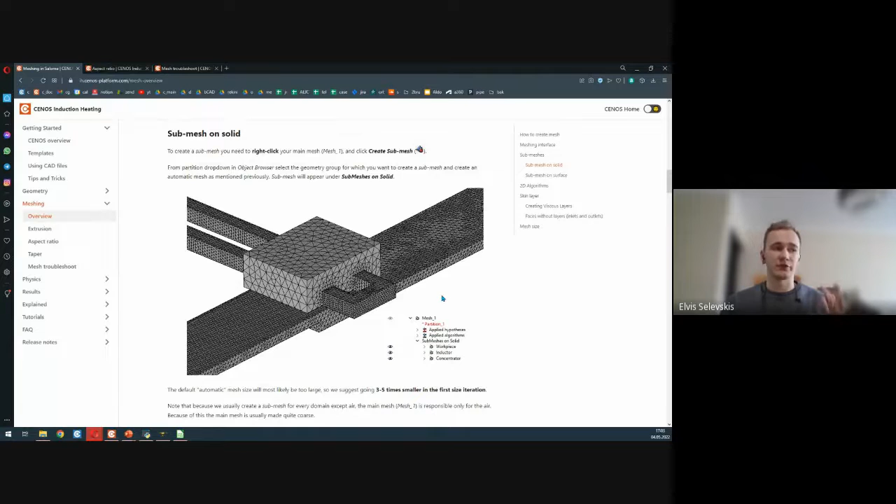Basically, what manual meshing and meshing in general is, is taking our geometry, whatever kind it would be, and splitting it all into smaller triangles, because that's needed for the calculation part of the electromagnetics and thermal analysis. All of that depends on us splitting the geometry into simpler elements, which in this case are triangles. Here we can see a part, and here you can see it all split into triangles.

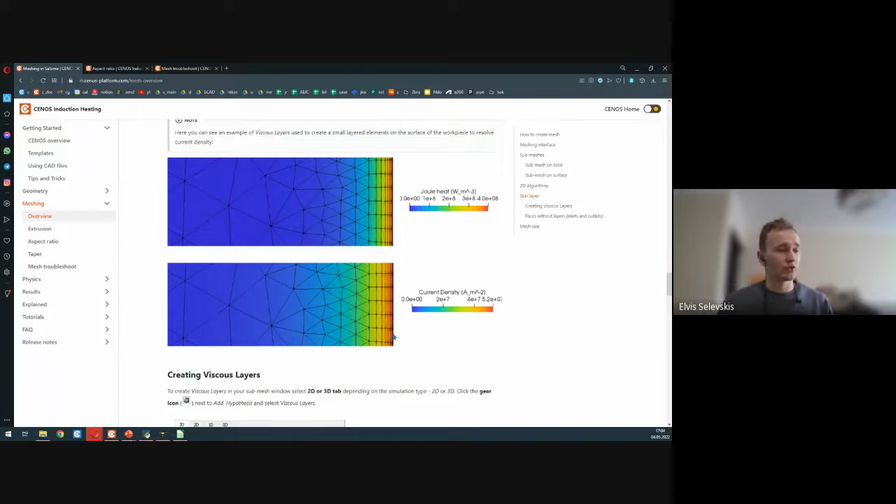Also a couple of algorithms, and also about the skin layer. To fight the skin effect that we have in induction heating, we will also apply viscous layers on the surface of the mesh, so that we can be sure that the high current density at the beginning of our simulation will nicely flow into the workpiece, and we won't lose anything there.

So we can turn back to the presentation. I have prepared an example where you can see a part being meshed here on top with some kind of preset mesh max size value. That's the size of these triangles that everything is split into. And another example with these triangles very fine.

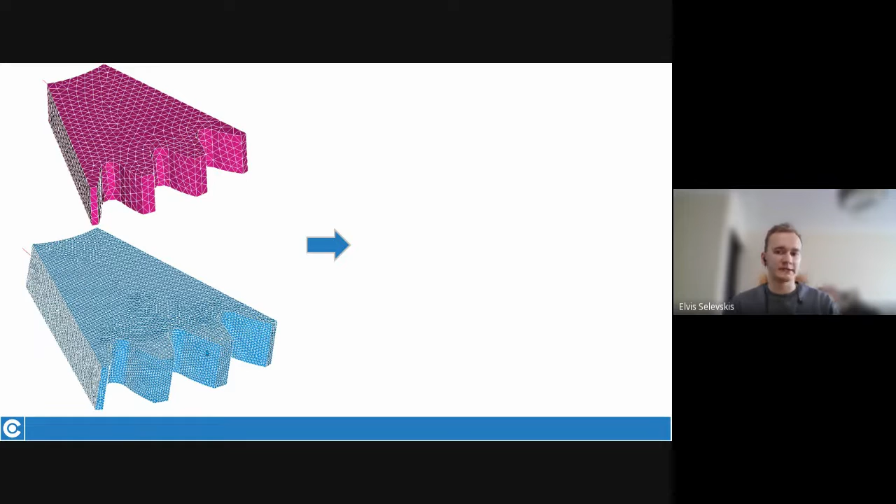The difference between these two is that the one on top has fewer mesh elements, so it calculates faster. But the problem is that the thermal distribution and temperature on this workpiece might travel visibly through these triangles. The one on the bottom has a lot more elements, so it calculates a lot slower, but you'll see the temperature distribution a lot better in the end results. What we will try to achieve today is to get the best of both approaches.

So having a very rough mesh or a very fine mesh, that would mean we have a mesh which is rough on the places where the inductor is not that close to the workpiece, and finer where we have very high current density. For this application, there's also hardening happening at this location. So to put it simply, we have rougher mesh everywhere else and finer where we really need it, not on the entire workpiece, but only on specific places.

What are the positives with this manual mesh optimization? The mesh max sizes will be better optimized, meaning we will have faster calculations but they will still be accurate. So better temperature tracking, also reduced mesh size. Instead of having very small mesh triangles on the whole workpiece, having them only on certain places will result in faster running calculations.

Another good thing here is that more complex CAD can be used, and perhaps even less need for CAD simplification. Because if you spend a bit more time meshing, and try to understand what kind of values would suit the particular project best, you can get away with having CAD which is a lot less simplified than for automatic meshing, where we would need to simplify the CAD files a lot more.

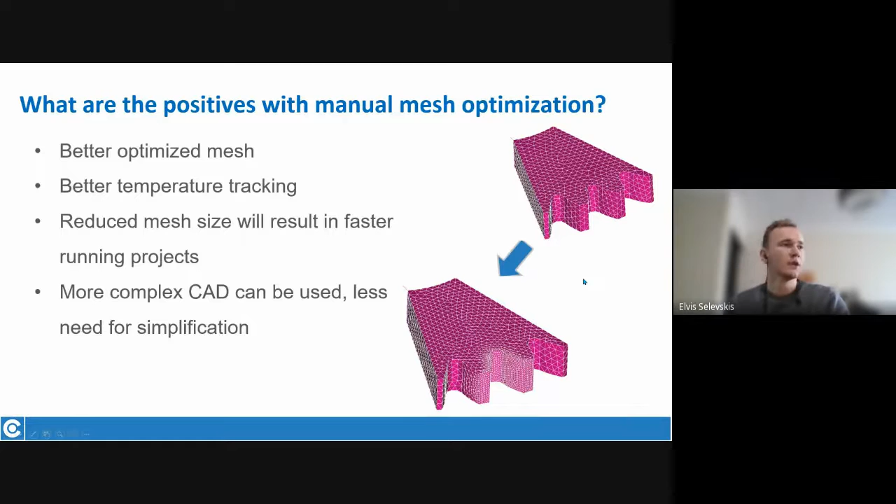What kinds of negatives are there with this approach? Manual meshing does require more time spent setting up the case, because we have to also enter Salome, which is where we deal with manual meshing as of right now. And of course it does require a bit of training to understand this approach better. That's also something I will try to show you today, and let's hope we get through this and understand the approach better by the end of this webinar.

But okay, let's start with setting up the case. First up, as always, we go to Save As and just save the case. I will write down the name, CENOS webinar, webinar 3. Press save, and the approach we will use in this case is the FromCAD approach. We will deal with the whole geometry grouping in FromCAD, and then with the meshing in the advanced geometry editor.

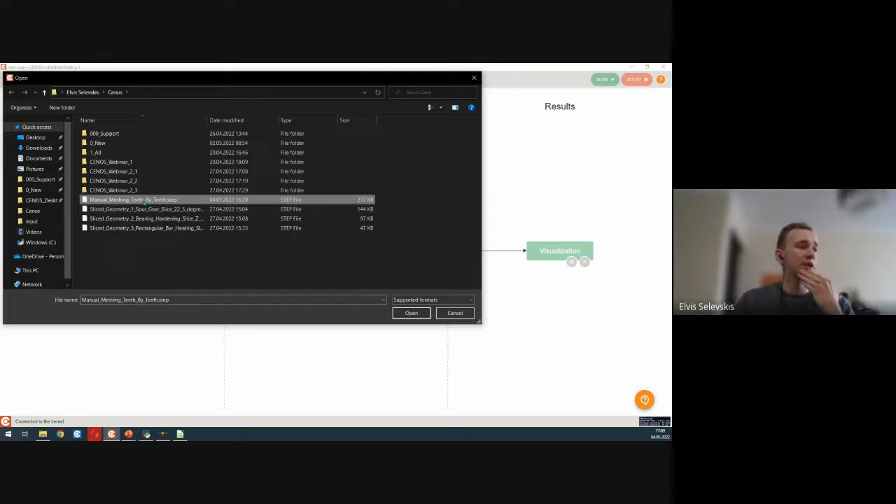So here, let's enter the FromCAD, and for this I have my step files already made right here. I just click on them, press open, and the CAD files will be processed.

Okay, so here you can see the geometry which we'll be working with. In this case, it's actually a slice geometry of a large gear hardening application. And here we have our inductor, also with the flux concentrator in this case. So it's a teeth by teeth kind of application.

For the simplicity of this video, I won't be setting up the proper boundary conditions for the sides here as a slice. For that, you can check our previous webinar recording. But I will mainly focus on what we need for manual meshing.

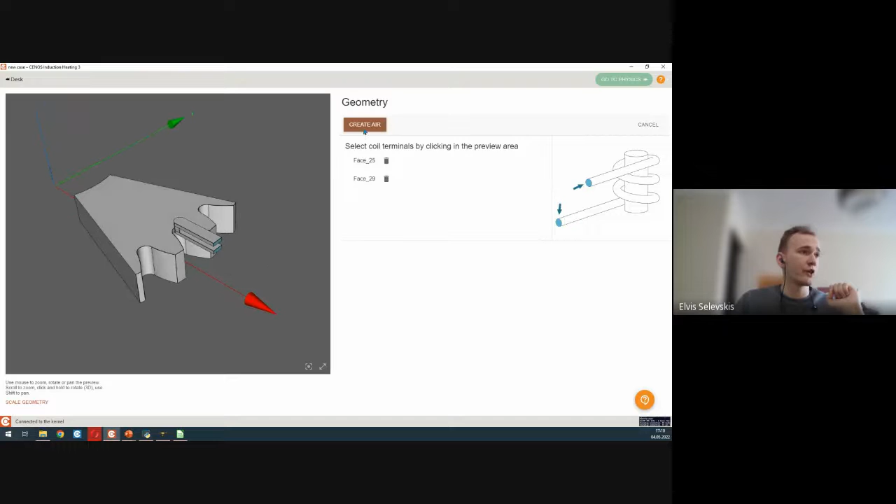In this case, I will also create the automatic air domain. Press yes, select the inductor's terminals. So here is the entry and here is the exit. Press create air. Air will be created in a moment.

I will start with the groups, which would be made as we would usually have them. First, I will select the workpiece as we would usually do it. For the workpiece solid, press select it here on the left, write in its name here to be the workpiece, assign workpiece. In the same way for the inductor, we just click on it, click on the inductor, rename it.

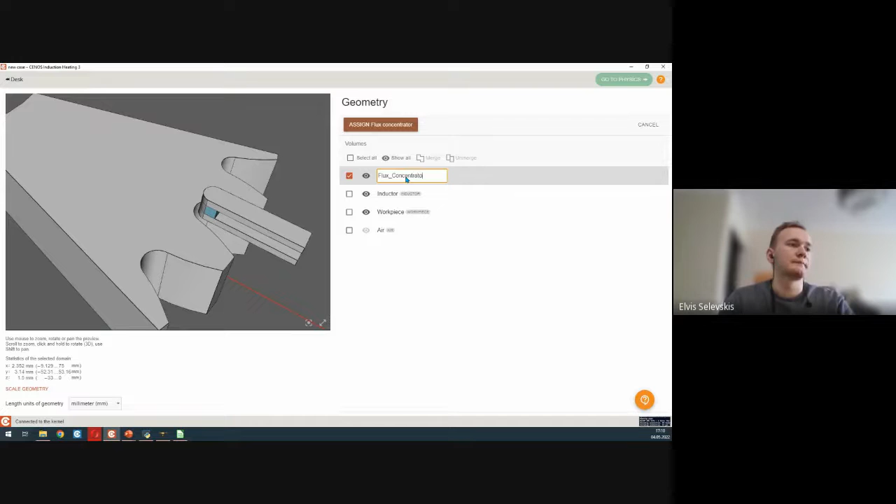And in this case, since we also have the flux concentrator, I will press add new role and choose the flux concentrator, which is right over here. Flux concentrator. Okay, assign it. And right now we will have some kind of changes from the usual case setup.

So actually what we'll need will be two separate workpiece surfaces. In this case, I will have one workpiece surface for this gap here where I will want the mesh to be finer, and a separate workpiece surface for all of the other faces, because we still need to have some kind of heat loss happening on the entire workpiece, of course.

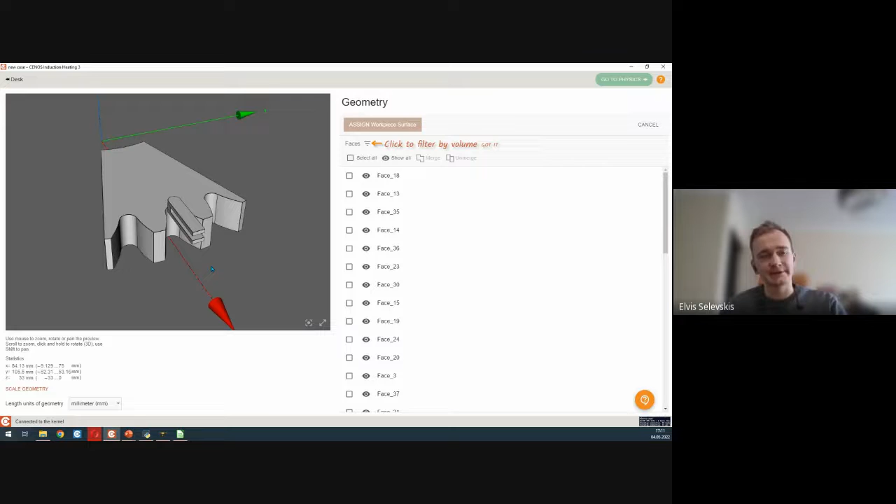So for this workpiece surface, I will press select. Here, what you would do also for your cases, you would select the faces where you would like the mesh to be finer. As I said, in this case, those would be this one, the one in the middle, and this face right over here. By holding down Shift, you can select multiple of them. So these would be these three faces.

If you want, you can also have the ones on the sides. Also, if you would like to have multiple of these groups where you have specific faces where you want different mesh size, you can also create as many of these groups as you want. You can actually have a different mesh size for each of the faces if you want.

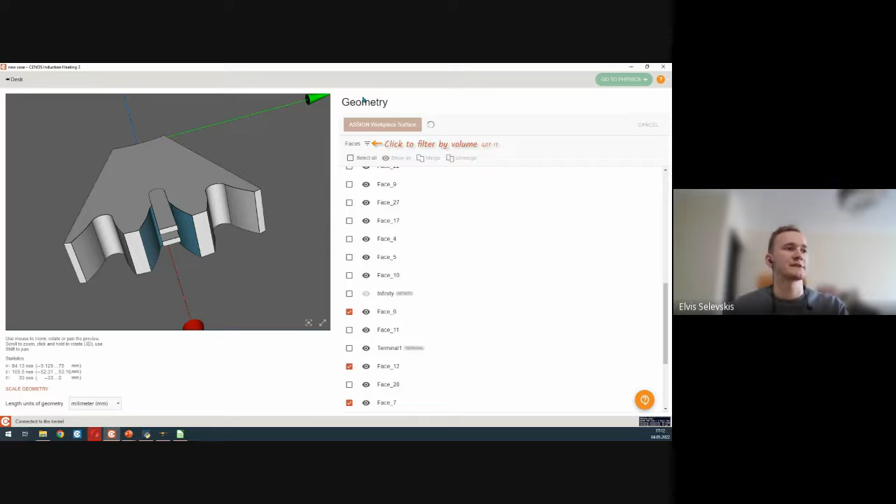But I will press assign workpiece surface, and right now to assign the rest of the workpiece surface, I will just press add new role, check the workpiece surface here, and I will filter the faces by volume. Just select the workpiece so we can select them easier. And I can press select all, but only scroll a bit down and deselect the workpiece surface which we have already, because that one we don't need in this group. Press assign.

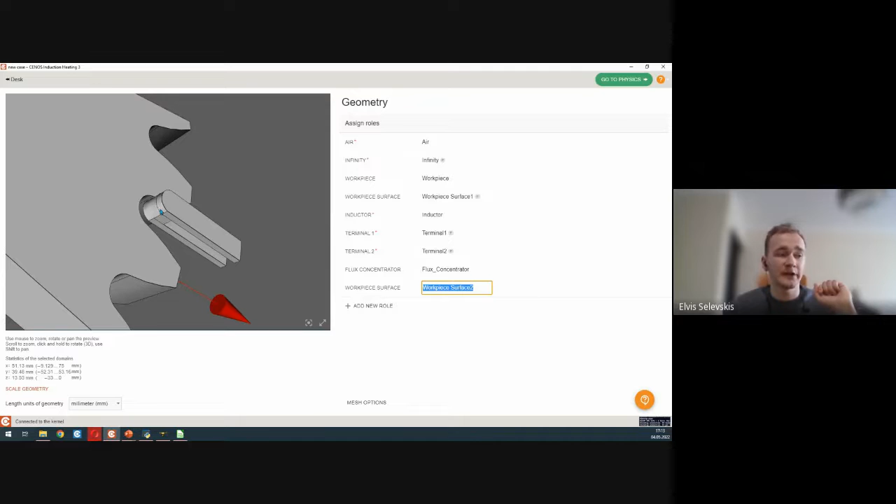For this setup, at least for this case, this is pretty much it. One thing which I can mention, I will also mention it a bit later, but also if you would like to have some kind of inductor faces be finer, so in this case, let's say if this inductor face we would like to have finer, we can add new role, other, and then just select those faces also in a separate group.

All right, now we can go through the physics. In the physics, I will input some generic values because we will mainly focus on the mesh in just a moment. In the simulation control, I will input frequency of 10,000 hertz and time of, let's say, 5 seconds, calculation time step of 0.1.

And then for motion, if you would like to also recreate this case after the recording is uploaded to YouTube, we can also have some kind of complex motion. In this case, that would be the z-axis, and the inductor would move downwards, or the workpiece would move upwards. In this case, I will actually move the workpiece with some kind of movement speed here on the z-axis of, let's say, something like this.

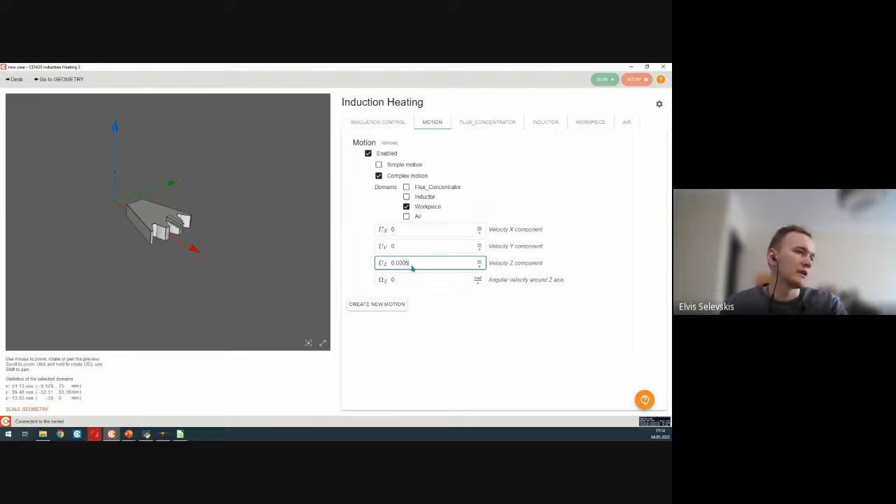So that's half of, that's a little maybe, okay, something like this in the upward direction to the z-axis.

For the flux concentrator, we just have to select the material. In this case, I will use Ferrotron 559H. Nothing more to do here unless you want to change the magnetic permeability and run it with a set value. For the inductor, I will input the current which we will use, let's say 5,000 amps. And for the workpiece, I will input the material of 1045 medium carbon steel.

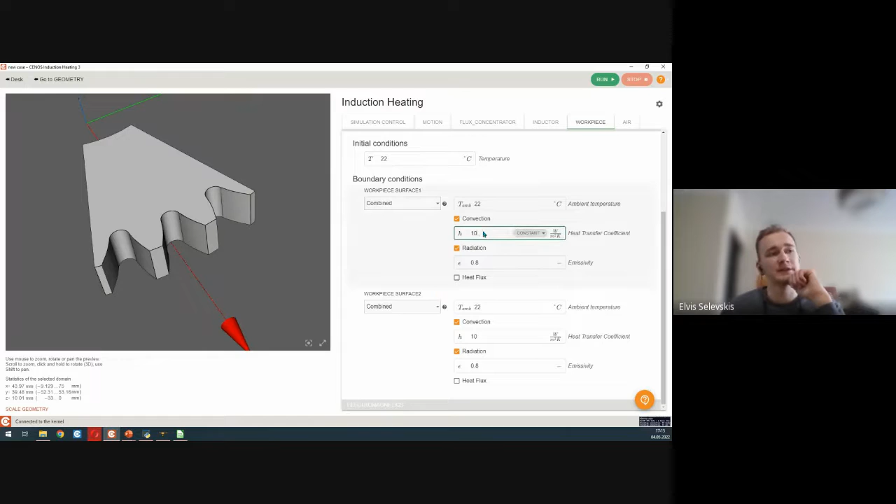Now we'll get to the main course, going back to the geometry, entering the mesh options, and pressing create automatic mesh now. This will create the automatic mesh. If you've ever run a FromCAD case without manual mesh adjustment, it just makes the automatic mesh with some kind of presets the software has, and we'll use this automatic mesh in Salome just to adjust its values. It will basically have created a template for us that we can nicely use, and for this template we will just adjust the max size values as we see fit.

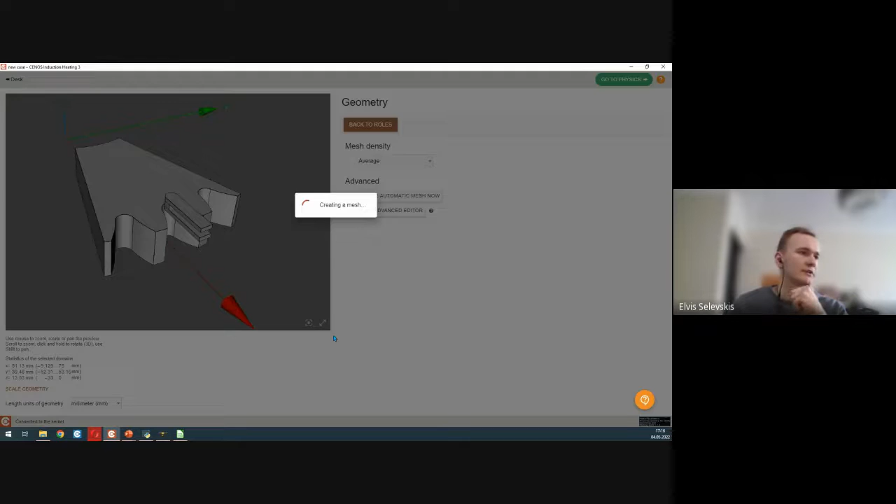This might take a moment. Oh, actually it computed quicker than I thought.

Also here on the bottom right, for some of you who might not have seen this before, we can see the number of mesh elements, so the number of triangles produced for the air, flux, inductor, workpiece, and total. But as I said, what we'll actually do is open the advanced geometry editor and adjust the mesh max size values on our own.

Okay, Salome is opening in just a moment.

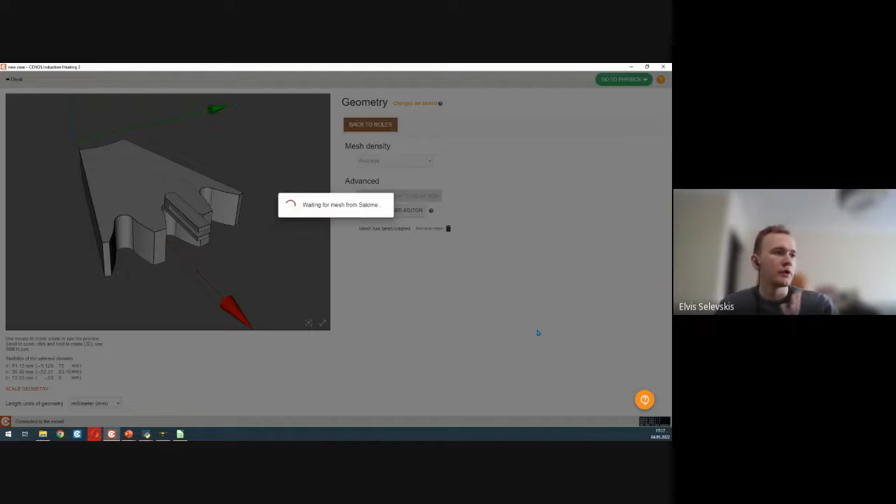So while we do not send the mesh back from Salome, this window will be open the whole time in CENOS. That will only end when the mesh is received. Salome has opened for me, and since we've dealt with the geometry and grouping through FromCAD...

We can automatically go to the very last section here, which is the mesh. In the meshing section, here on the left, we can see the object browser. For the mesh, we can click the open button, and here we see our Mesh 1. Mesh 1 is the large general mesh inside of which all of our smaller solids are located. But inside of this mesh we also have submeshes, which are our solids: the workpiece, inductor, and flux concentrator. Once again, this is pretty much a template that CENOS has made, and we can nicely adjust these mesh size triangle values for each of these separate submeshes.

What I will do is right-click on Mesh 1 and try to compute the mesh. I'm not sure if it will go through or not, we'll be able to see. But after it does or doesn't compute, we'll have a good idea of how the mesh looks now, what can also be adjusted, or any kind of changes that might need to be done.

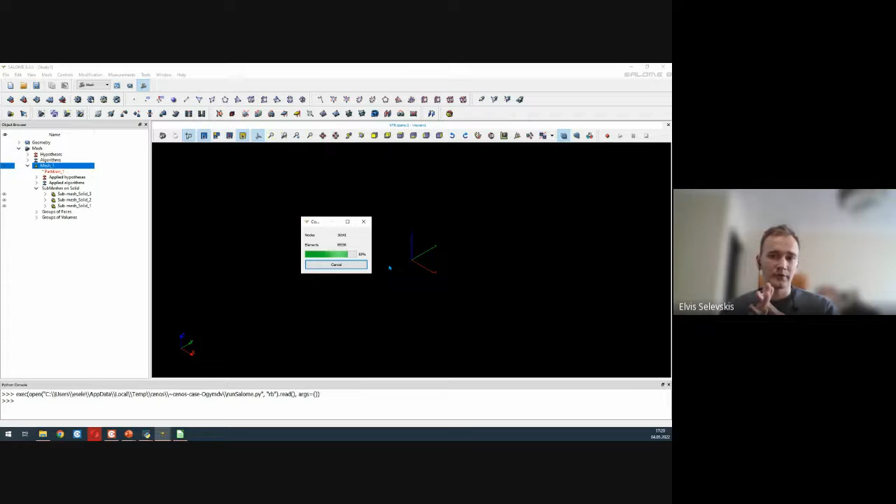Another thing I can mention: if you sometimes see that this meshing computation is taking a lot of time, have a thought—is your geometry really that complex that it should take that much time? Maybe it has stuck at some point. I would say if it doesn't compute for like 5 minutes and your geometry is not very complex, then it has most likely stopped or is just not able to compute something.

For us, luckily the mesh computation has succeeded, and here are some interesting things we can see. Where we have the volumes, this amount tells us how many triangles, or mesh objects, have actually been made in this mesh. A couple of quick tips about this number: I would usually recommend that you try to keep it under 300,000, depending on how complex your case is, but for most cases you should be able to keep it under that.

Why do we want to keep the amount under 300,000? It's because afterwards the amount of RAM necessary for computing the case just starts to grow quite a bit. If you have 32 gigabytes of RAM, you should be able to compute cases up to like 450,000 elements, but upwards of that, more and more RAM is required.

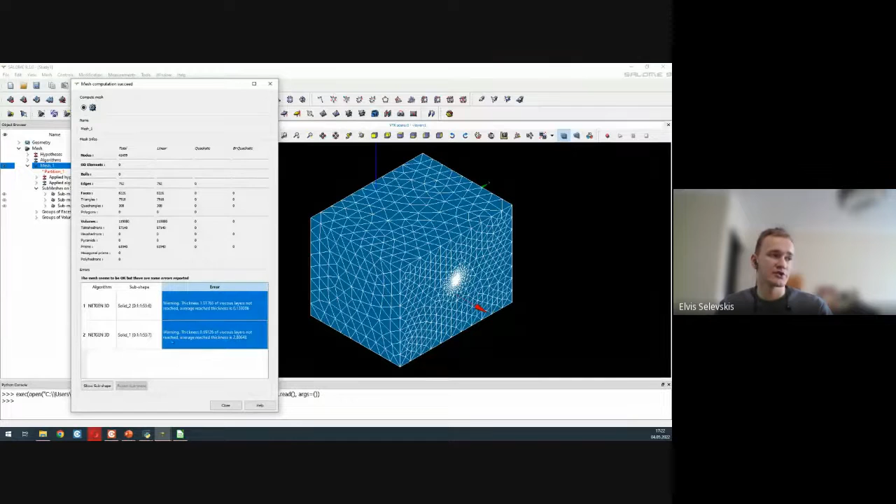Some other things we can see here: these two things are some kind of warnings. They're not errors, but they tell us that some kind of thickness for the mesh, for the viscous layers, has not been reached. This can be because of the geometry being, let's say, too thin, or having some other issue where certain mesh values input by the automatic mesh cannot be reached. This doesn't mean there's an actual issue—there are no real errors, just warnings. If we close this up, we can finally take a look at the mesh.

Here we can see the large airbox—this is the entire airbox. You can see the triangles here are quite large. Outward of the airbox, if we zoom in, we can actually see the inductor's terminals with the viscous layers already developed on the sides, on all of the outer faces of the inductor.

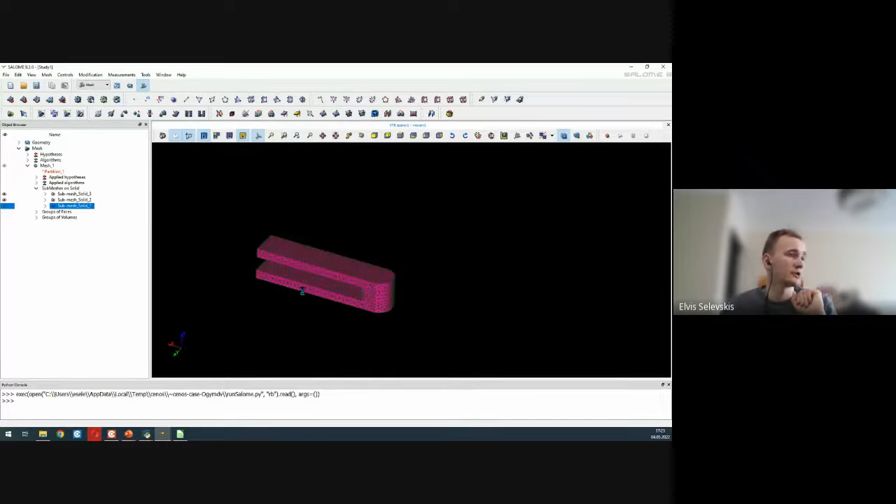If I disable visibility for mesh 1 and just enable it for each of the submeshes, here we can see our flux concentrator, here we can see our inductor as well. Everything has nicely split into triangles—it looks quite good, to be honest. And also our workpiece, which, if you ask me, is a little too rough for what we'd like to see. If we ran the case like this, we would most likely see some hotspots resulting from the mesh, because there are too few points where the simulation can compute and result in a nice temperature distribution. So you would probably see these triangles also in the result.

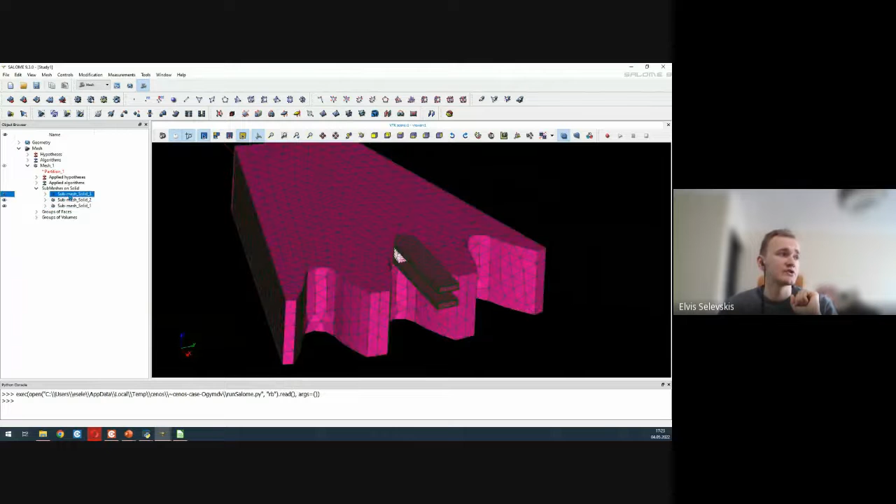What we will do now is try to adjust this triangle size just for the workpiece. To do that, we click on solid 1, right click on it, press edit submesh, and when we enter we're automatically in the 3D section. Here we can adjust the viscous layers—exactly the same thing we saw on the inductor. We have them also inside the workpiece, as well as a couple of computational algorithms in the 2D section. And for the 1D section, here we can adjust the max size of the triangles within our workpiece. To adjust this value, we can click on the gear icon and press max size.

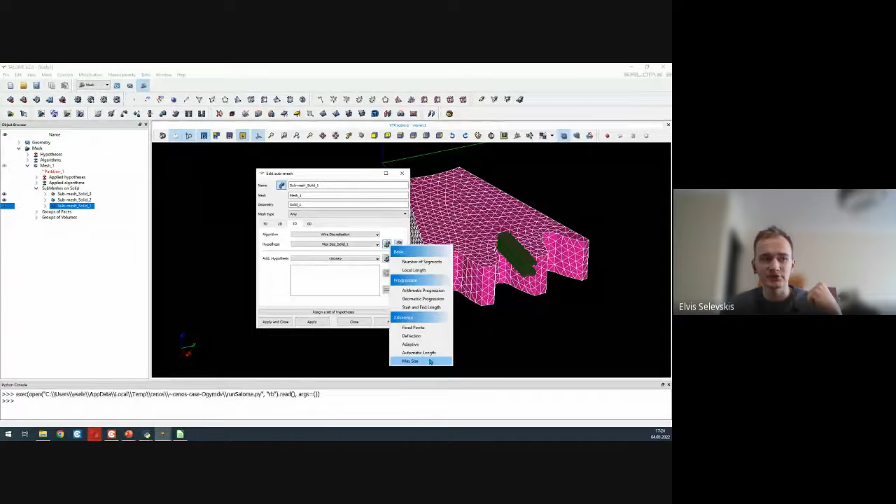This will make a new kind of value for the mesh, for the max size of the triangle's edges. Or we can press the edit button to edit the value we already have. As you can see, the length here is like 2, and the units are millimeters I believe—so 2 millimeters. What we can do, if we decrease this value, the triangles will also get smaller, since their edges won't be able to be as long as they used to be. If I write in the value of 1, so this is 2 times smaller, press OK, apply and close, and try to recompute the workpiece.

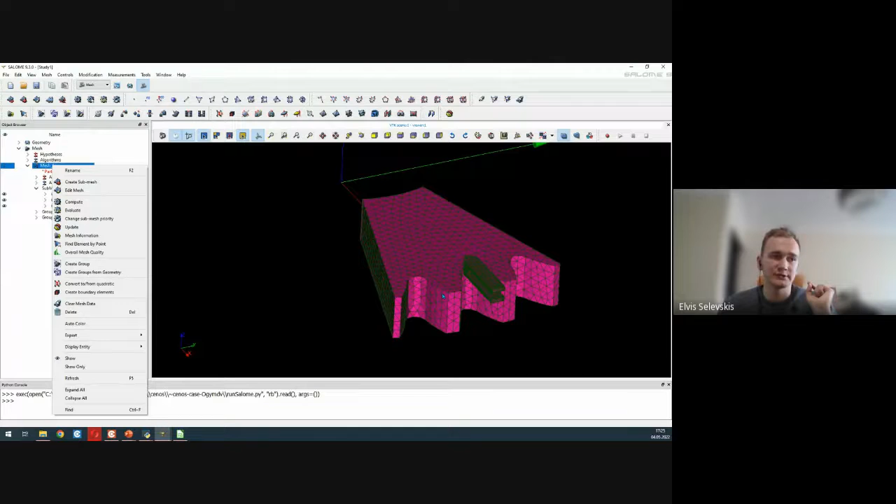Here I'll click on mesh 1, right click, and clear the mesh data, so we don't have the old workpiece and old mesh on top of it, since we changed the value in submesh 1. Right click on submesh solid 1 and compute the mesh. We'll see how long this takes, but it should be a bit longer than previously, because as I said, we'll have 2 times smaller triangles—meaning more of the smaller triangles, since we still have to fill the same volume, just with smaller triangles.

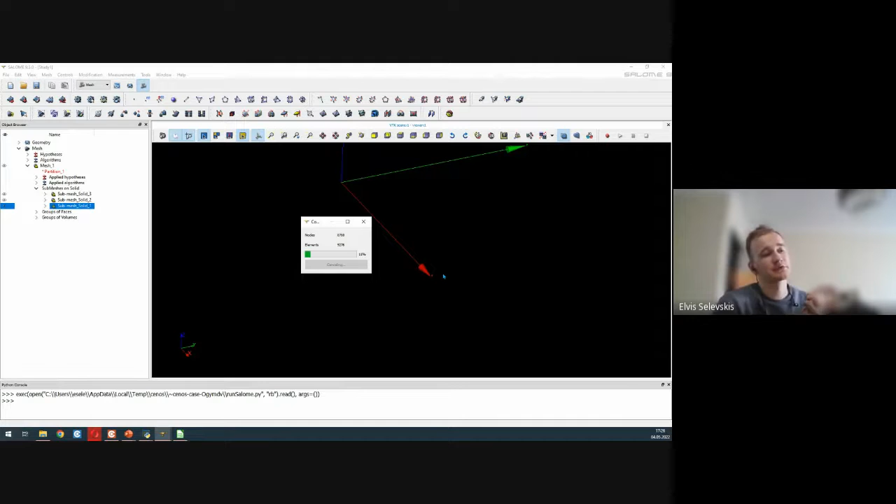In this case, I expect it should take a moment, because we still didn't adjust the viscous layer values, which is also something very useful that we could do. Okay, I will try to cancel this. We will see what has already been made. Then we will adjust the viscous layer values and try to recompute it again, just to show you how much the viscous layer values can change how quickly the case computes.

About viscous layers, as I mentioned at the very beginning of the video, here we have multiple elements on the very surface of the workpiece. The small problem is that in the originally computed values by the software, there's a bit too much of these viscous layers, at least for most cases. So that's something we will reduce in order to have fewer elements in the end.

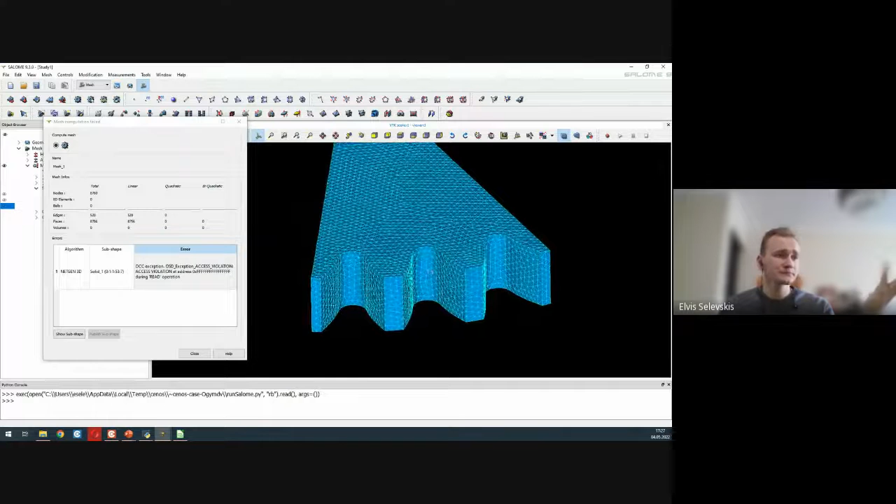Here we can see that the mesh computation has failed. Now this is an actual error, but that's because I actually stopped it. We can see that on the surface these elements have already computed, and the mesh is actually quite a lot better than it used to be. This is pretty much something actually usable already.

But to adjust the viscous layer values, we will go to submesh solid 1, press edit submesh, and go for the viscous layers here to edit their values. If I press edit, we can see the three main things which we have for the viscous layers.

So the thickness, that is how thick the viscous layers will be; the number of layers, so this is how many of these layers there will be; and the stretch factor, which is by how much each of the next layers is thicker than the previous one.

What I would like to comment here: number of layers 17, for usual kinds of cases, this is way too much. I would say if you're running low frequency, then usually number of layers 4 is perfectly okay. And as you start to increase the frequency, or your case starts to get more complex, I would suggest, if possible, have 5 or 6 layers. And if you have really high frequencies, then have like 8 as the number of layers at least.

For this case, I will use 5 as my number of layers, and for the total thickness, this value has been computed to match the 17 viscous layers. So this thickness value also has to be recomputed.

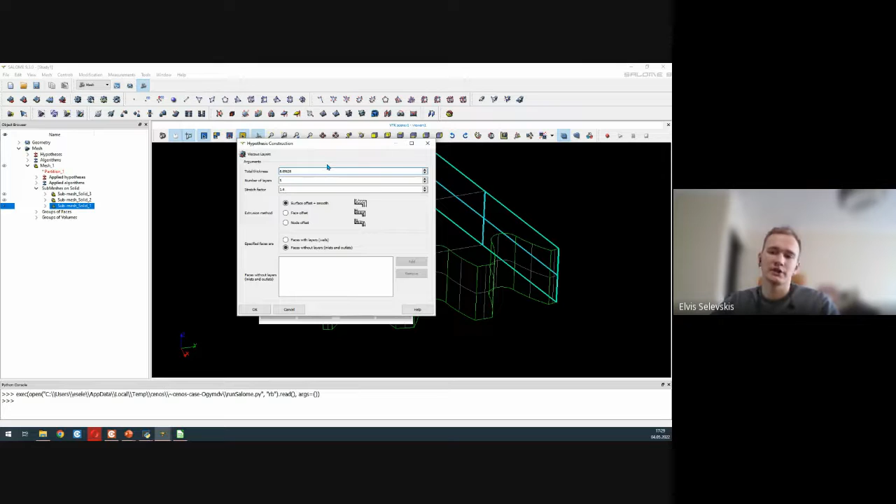To recompute this, some of you who were here for the 2D manual meshing and case setup video will know that we use the viscous layers calculator, which I have right over here. Some of the inputs which we have here at the very top are the magnetic permeability of the material, the frequency we're running, and the maximum electric conductivity.

And then at the end we get the recommended viscous layers skin depth values. Here we can also see common magnetic permeability values and common electric conductivity values. As it was 1045 steel that I used for the workpiece, we can check the common mu values. This is once again an approximation, but it's something which works quite well.

So 150, we just input that right over here. After I press enter, you will already see how these values change here on the right. You can see that they greatly change just by changing the magnetic permeability. Then the frequency, it is 10 kilohertz, that's correct. And the electric conductivity should be changed for the one which I have here for the 1045 medium carbon steel.

Right here we can see if our number of layers is 5, so that's the number of layers that we do run, we have to use the skin depth of roughly 0.35 millimeters. So let's just go back to Salome and input that value. So here, 0.35.

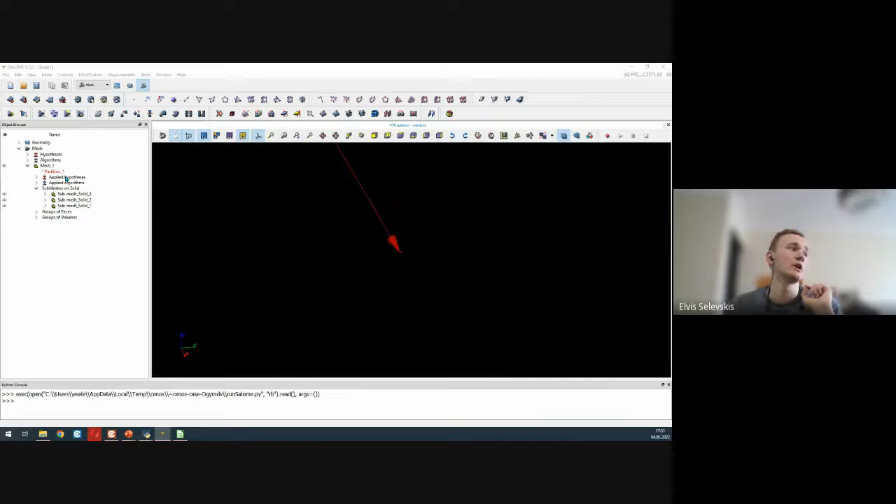And that's pretty much it, nothing else needs to be changed. Press OK, and that's the only thing which we will change. I will press apply and close. Once again, clear the mesh data just so we don't have any leftovers. And I will press compute, and I believe this will run through a lot quicker than it did previously.

Previously we actually canceled the computation of the mesh, but right here I think it will manage to go through. Yeah, so as I said, it manages to go through, and a lot quicker than it did previously.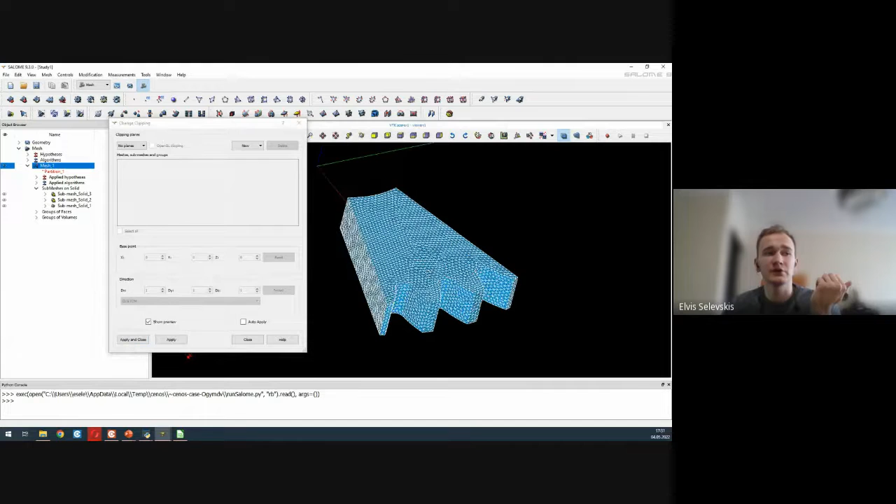Perhaps to put a better visualization on how these viscous layers actually look, I can right click on our workpiece and use the clipping aspect, which will allow us to see what's happening on the inside of the workpiece. Here on top, I can select new, some absolute or relative. Let's go for absolute, and here we can see where our cut is located.

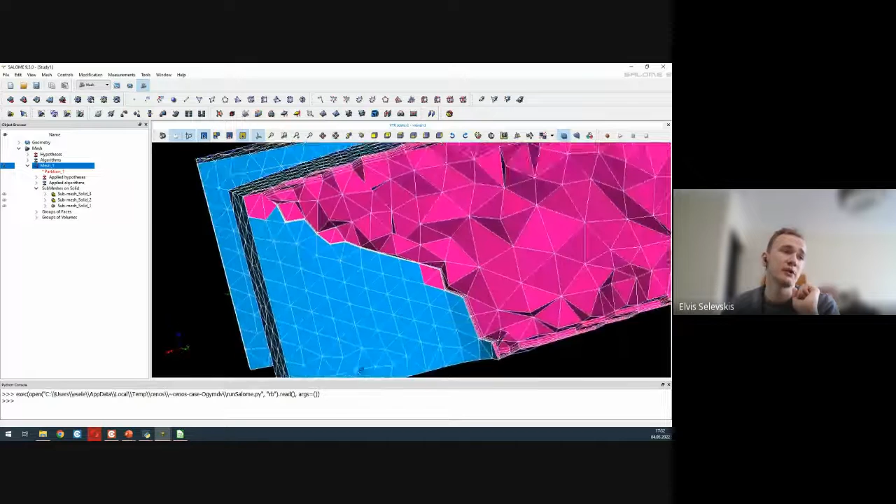So we can move it by dragging the arrow or dragging the red box, so we can see where we want the cut to be made. For me, it's perfectly okay to have it here. Press apply and close, and we can see how this mesh actually looks on the inside of the workpiece. Here we can see the general mesh triangles, and on the very surface of all the parts which we cut.

We can also see how our viscous layers are looking. In the next webinar, the fourth one about result visualization, we will also see how much these actually do impact the current density and the proper soaking up of the current inside of the workpiece.

But okay, this is it for the initial adjustments for the workpiece submesh. In the same way, we can go for the inductor submesh, which I believe was this one, or this was just a moment... oh no, never mind, that was the flux. Let's go for this submesh, which should be the inductor.

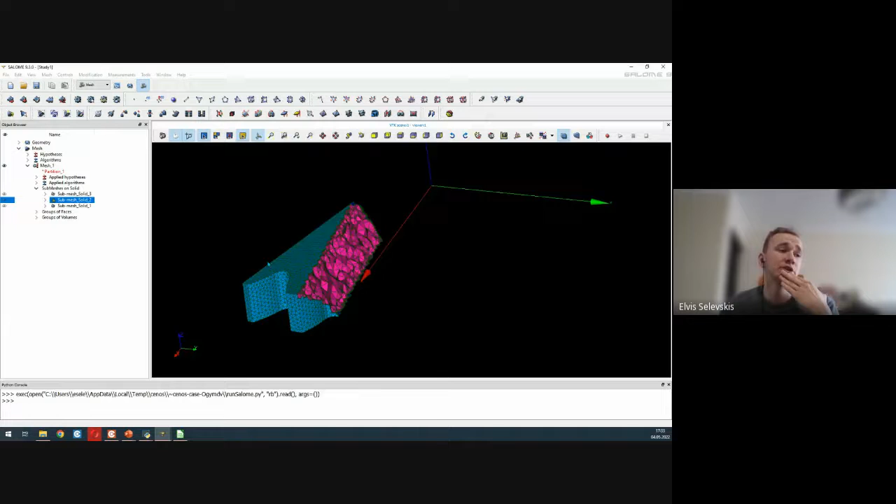Here we can see some kind of viscous layer values have not been reached, but we will change those in just a moment.

About the max size, the total size of the inductor triangles — in this case, I think it's okay to run it like this, but I would usually also try to have the inductor a bit rougher. A general rule of thumb is that on any side planes you have, you'd want at least 2 to 3 mesh elements from one side to the other. Here we can see 2 to 3, but on the top we have a bit more. But for this case, it's okay.

The only thing we will adjust will be the viscous layers, which we can see here. If I press edit the submesh, drag it to the left, here in the 3D section, once again we have the viscous layers. If I press edit, we can see the number of layers is 7. If we actually count them one by one, it should be 1, 2, 3, 4, 5, 6, 7 — so that's exactly how much we have.

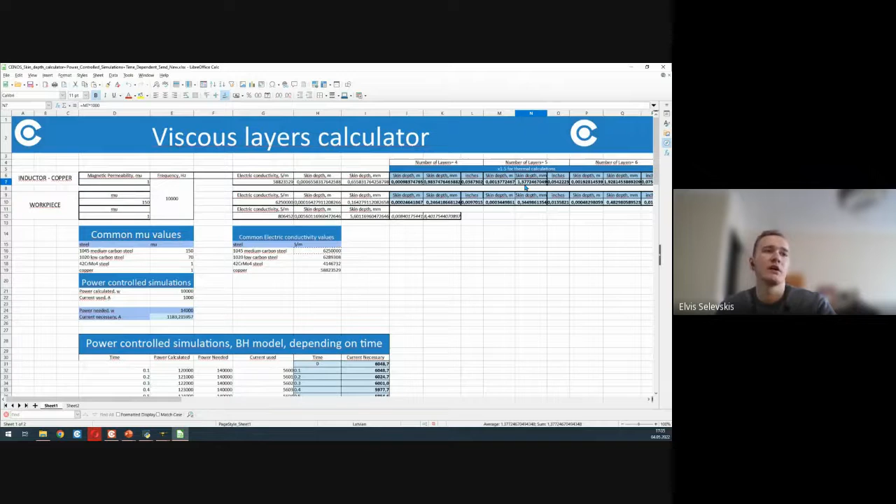For this application, since it's quite low frequency, I will actually use number of layers as 4, and the total thickness we can conveniently check in our calculator for the inductor, since everything is preset. We just have to check the value, and the recommended skin depth is roughly 1.3 millimeters, so we can also adjust that. It's okay, apply and close.

One thing which has just appeared — the software is telling us that there are two submeshes which are closely together: the flux and the inductor, which is directly on top of each other. So it's asking which one of these two we should compute first.

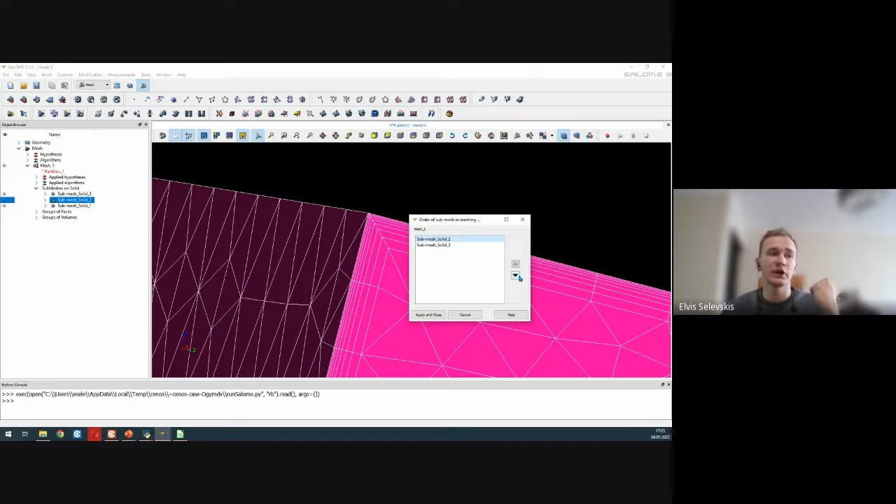We can press yes, and here we have to select which one to compute first. In this case, solid 2 is the inductor, and solid 3 is the flux, so we should have the inductor actually be higher than the flux. If these are switched in your case, you can just click these arrows and change their submesh priority. Press apply and close.

We can clear the mesh data once again and just compute our inductor to see how it's doing. So once again we have that warning for the viscous layers, which is most likely because of our geometry being quite thin — these viscous layers cannot develop as large as they would like to. But still, we can see that now we have 1, 2, 3, 4 layers instead of 7.

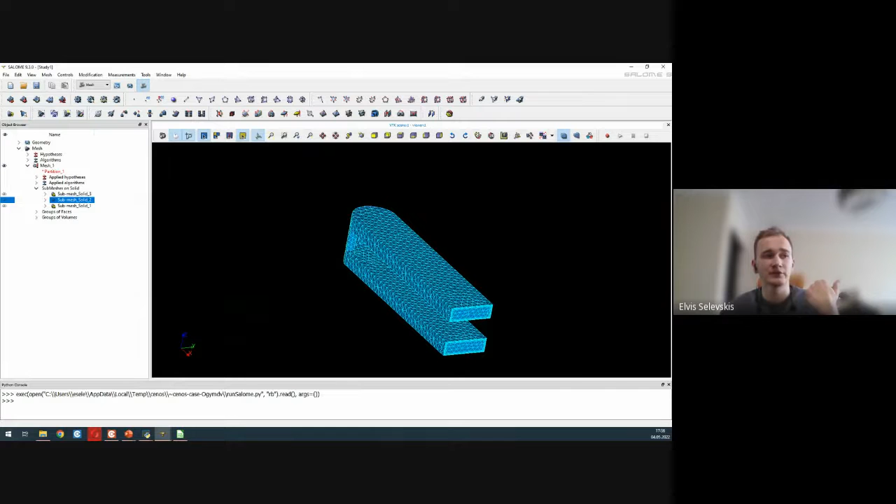Which is once again a bit of an optimization, because if we imagine each of these triangles on the surface previously had 7 elements underneath, and now they have just 4, that adds up in the end, and we come out with a much more optimized mesh.

For the flux, something I can also mention if we compute the flux: in this case, the flux mesh is quite a bit too fine. Similarly, for the inductor, we can make it quite a bit rougher, and the results won't change that much for the workpiece heating. But if you're interested in the flux heating, the magnetic flux density in the flux, or the current density in the inductor, then have the inductor mesh as fine as you need it to be.

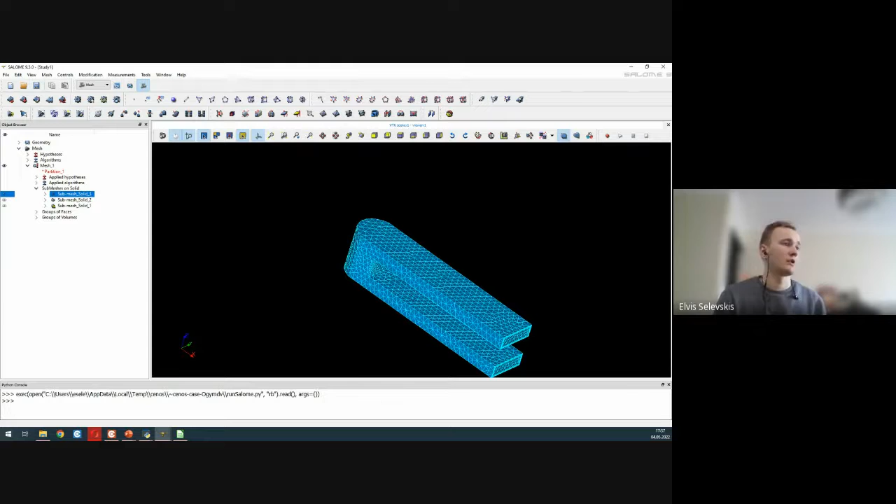Now, what we will be doing is making a mesh which is finer in a certain place on our workpiece. So for this, I will recompute the workpiece, and then we will also implement the finer mesh in the very gap, so we don't have to make the entire workpiece a lot finer.

One question has appeared in the chat box about the possibility to implement viscous layers only on some kind of surfaces in the workpiece instead of the entire workpiece. This is something we can also touch on very quickly.

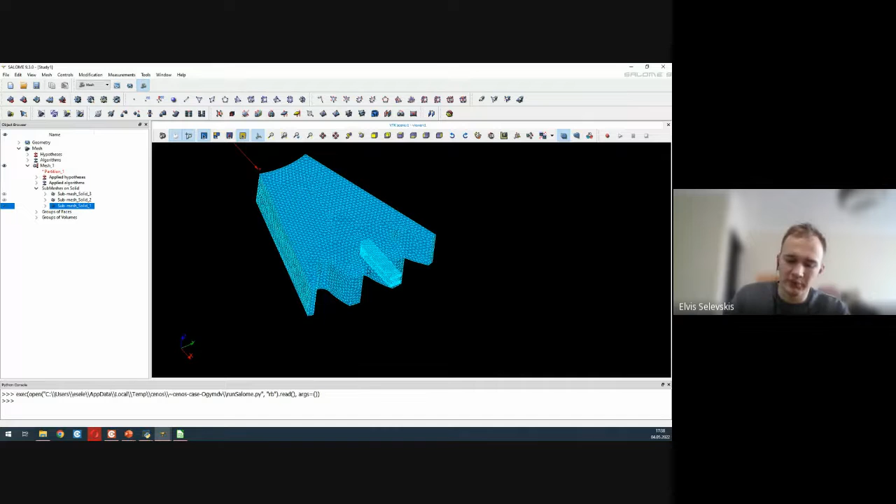We will actually go through the workpiece fine, which I would like to show you now, and then I can also show you the implementation of viscous layers on only specific faces, which can also be used. That's a bit of an advanced tactic, but I'll keep that in mind.

Okay, so right now, to have the mesh only finer here in this gap, what we actually need to do is quickly go to the geometry part to check which of the objects in the group we made in FreeCAD is actually the faces we want to make fine. I'll try to put it a bit more simply.

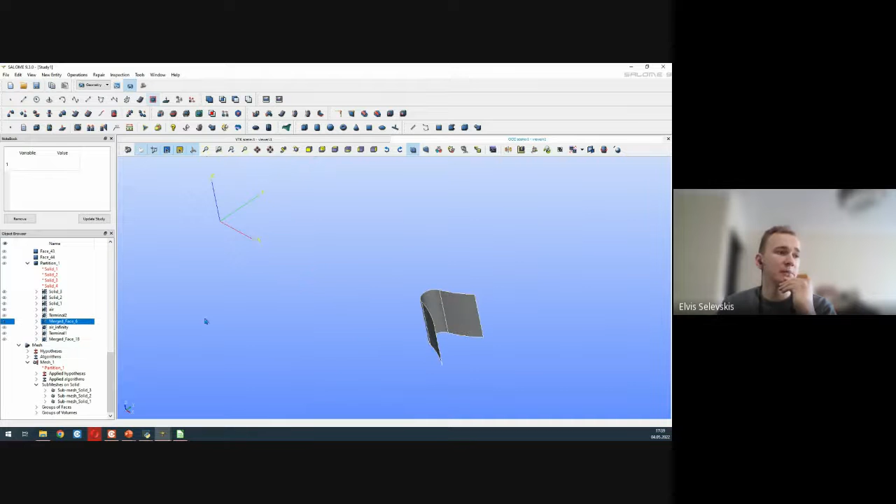So here, if you go to geometry, on the left in the object browser, similarly as we did for the workpiece, if we open it up and go down, here in the partition we can see all the geometry groups made in FreeCAD. Here we have solid 3, solid 2, solid 1, which are our solids, as well as some faces. Here we have merged face 18, which is actually the rest of our workpiece interface, and then merged face 6, which is the one we would actually like to have finer.

So right now, since we know this is the face which needs to be finer, we can go back to the mesh and create a separate submesh with smaller triangles only for this geometrical object. To do that, we go back to the meshing, click on mesh 1, right-click on it, create a submesh. For the submesh name, I will write workpiece fine.

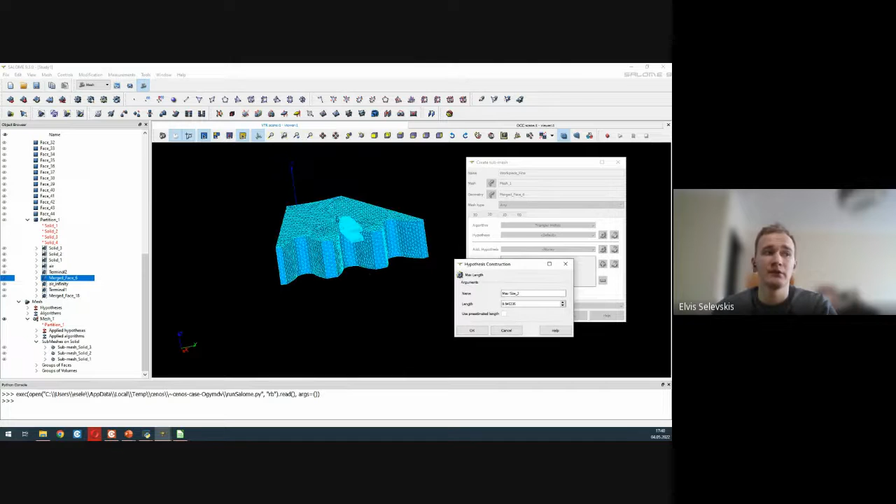And for the geometry, we just select the one we just saw, that's merged face 6. I click on it. Right now, what we need to do is assign a set of hypotheses to the automatic triangulation, and here we can input the max size, which we also did for the workpiece. Since for the workpiece we had it as 1 millimeter, and we need this to be smaller so the mesh is finer, I will try a value of 0.6, and we'll see what happens. Also, just to organize it better, input that name there, and press OK.

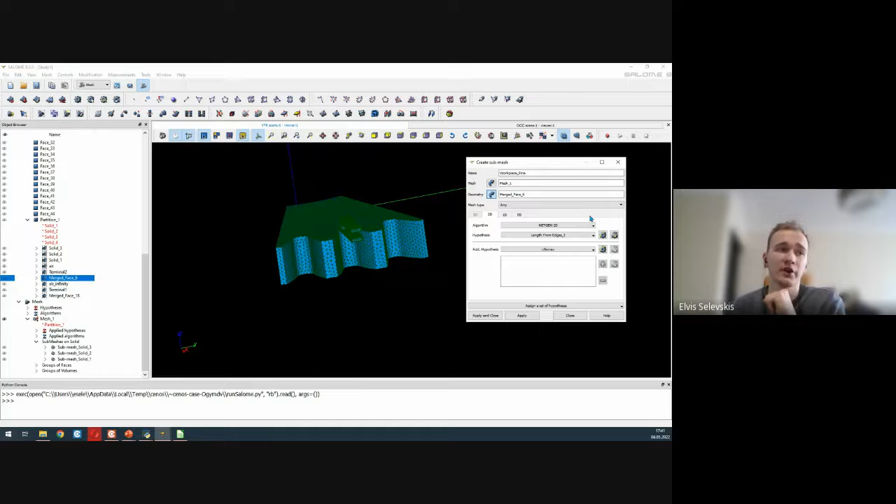One thing to mention: here for the algorithm, you can change it to NetGen 2D, as well as include the length from edges hypothesis, just to have a better element count economy. This is just changing the algorithm so it ends up with a bit less elements.

We press apply and close, and right now, similarly as before, the software asks which of these submeshes, which sit right on top of each other - the workpiece fine and the workpiece - should we compute first. We click yes here, and for the order of submeshing, we need the workpiece fine to be higher than our workpiece 1 solid. So we click on it, click the arrow button, and right now we will first compute the workpiece fine and then only the rest of the workpiece solid. So this is how it should be.

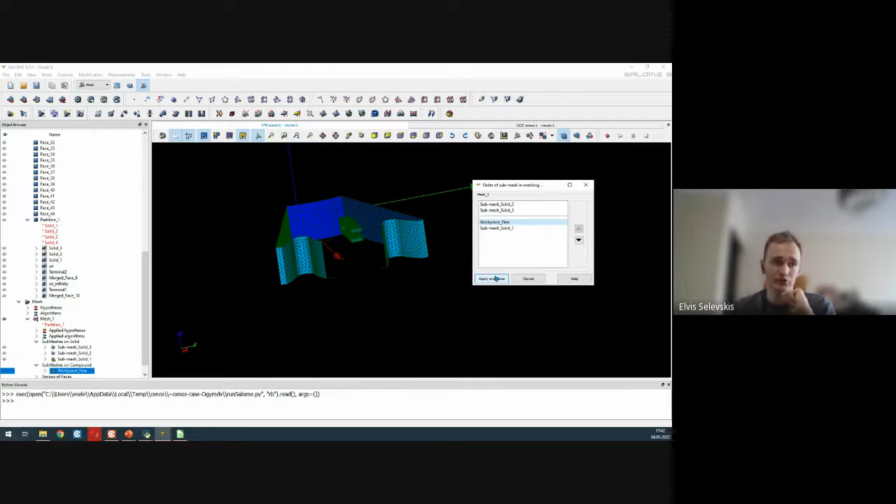Press apply and close, then we can clear the mesh data and compute the workpiece fine to have a look at it. Yeah, so it has computed, no errors.

We can't really see that much that it's finer than the rest of the workpiece, at least right now. But we can compute the workpiece so we can see the difference a bit better. If we don't see it that much, I'll just make the workpiece rougher as it originally was, because if we make this local adjustment, we don't need the rest of the workpiece to be as fine as I had it just now.

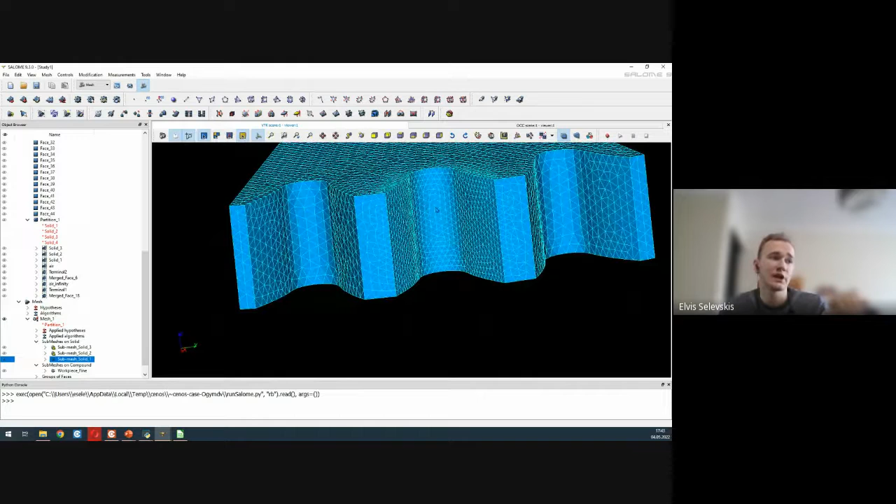Mesh computation has succeeded, and we can see the difference if we take a look at this gap and the difference in mesh sizes at this gap. So here there are a lot more triangles than at this gap or this gap right over here. Also on the top we can see the mesh has smaller triangles here than at these edges on the side.

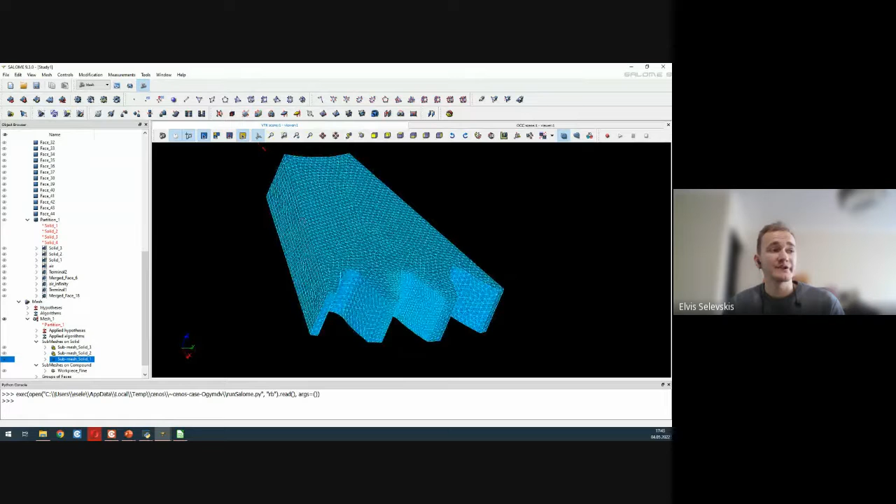Something which Raymond has asked us in the chat is if we can tell the software to have viscous layers only on specific faces instead of on the entire workpiece. In this case, I'd say it's best to have the viscous layer pretty much everywhere, just to make sure we don't have any issues. But actually these faces on the sides, so this face, let's say this face in the back and this face on the side, don't need viscous layers, since the magnetic field and current density will be high right around here, not at the end or at the sides.

So what we could do is quickly go to the geometry. I'll include this with another thing I wanted to show you. So to not have viscous layers on certain faces, we have to tell the software which of these faces we wouldn't like the viscous layers to be on. To do that, we probably should have done it already when setting up everything in FreeCAD, but if you didn't do it then, no worries, you can also do it here in the geometry section.

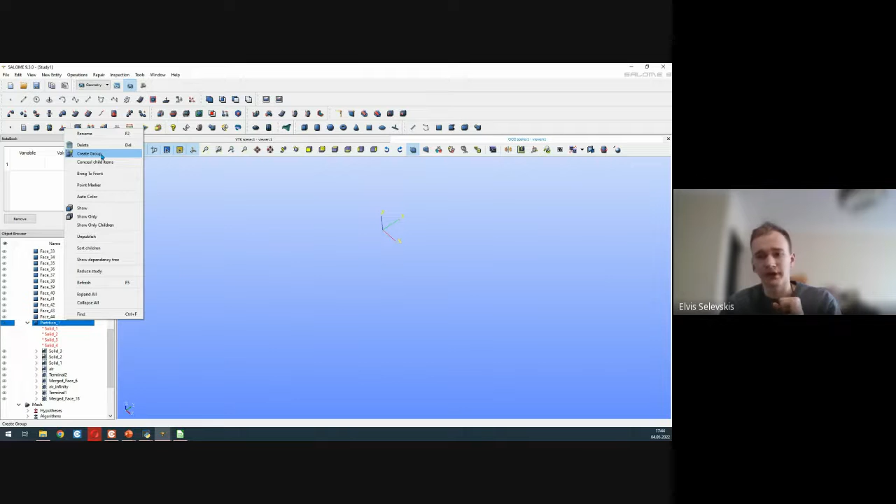For partition 1, we can right-click on it and create a new group, exactly the same way as we did for the 2D case setup. So here we create a group, and on top we select what kind of group. In this case it will be faces, since I want to apply it to faces where I don't want the viscous layers to be. To get to those faces, I have to click on the airbox here, hold down Shift to select multiple, and hide it so we can see what's happening on the inside.

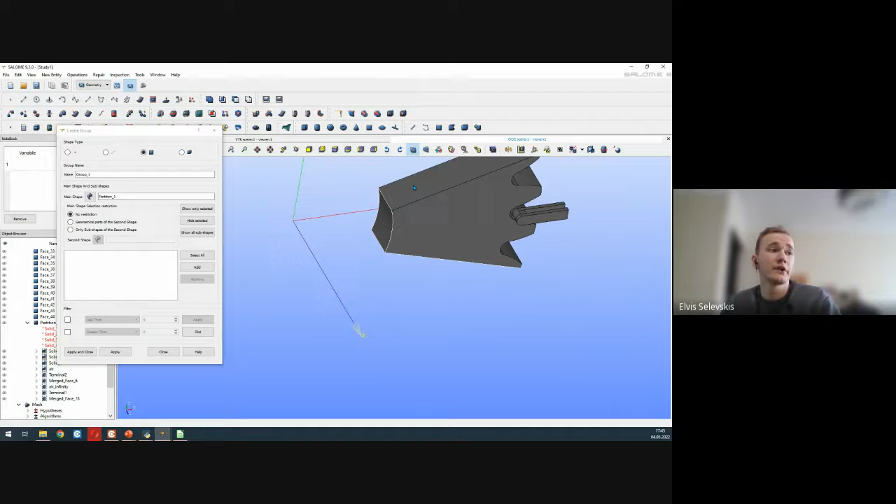Similarly for all the rest of them. Right now, to select these faces where I don't want the viscous layers to be, I just click on one, the other one, and the third one. Press add, and all three faces are in this group. I'll name this group 'geometry' since we made it in geometry, and 'no viscous layers workpiece' or something like this. Applying close, and right now we have that group here on the bottom.

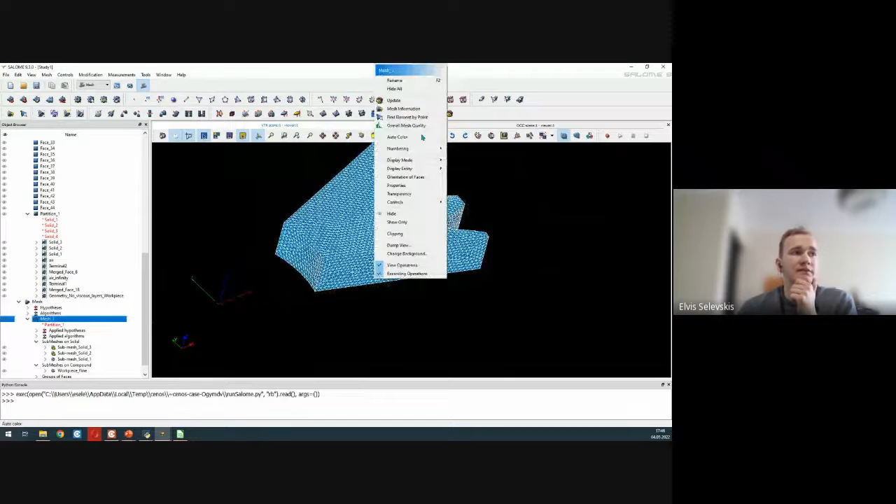Yeah, so we can already see how it looks. To implement this group, we go back to the mesh, and pay close attention to how our workpiece sides are looking right now. So basically what we have is the viscous layers on all of the faces, so we can't actually see them because they're all on the inside. What I'll do now is open these faces up so we'll be able to see the viscous layers on this face, the face on the bottom, and the ones on the sides.

So to do that, we can click on the mesh, submesh solid 1, which is the workpiece. Right-click on it, edit the submesh, and here for the viscous layers we go to edit them once again. Here on the bottom, we can tell the software the faces we want with viscous layers or faces without viscous layers. So that's the one we'll actually use — faces without viscous layers. Here on the left, we click on the group we just made, press add, and press OK. Similar way to remove it.

Applying close, and right now I will just clear the mesh data and recompute the workpiece once again, and you will be able to see the changes. About this approach, I would say first get the workpiece fine ready, get the mesh max sizes ready, get the viscous layer ready, and then only if you think that is the best way to go, you can try this approach also to save a bit on the element count economy.

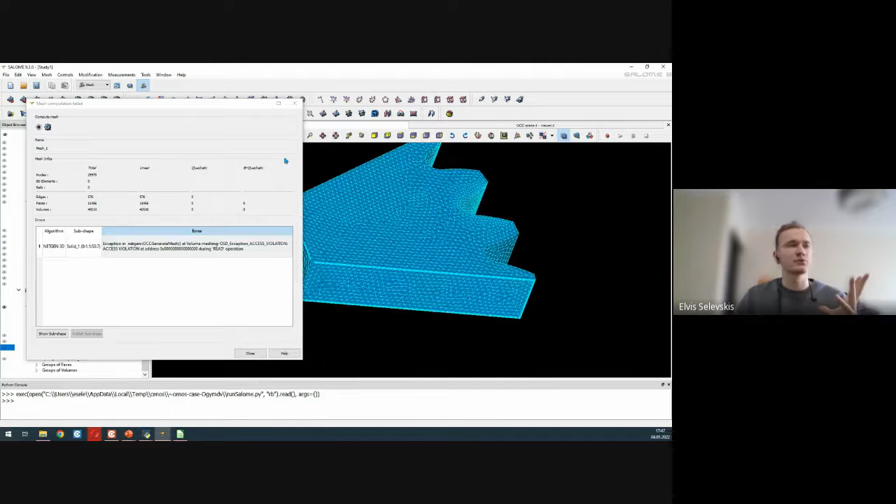Right here, what you can actually see is the negative thing of this: there's some kind of an actual error which we previously didn't have. So the error is that because we took out some faces away from the viscous layers, basically the balance inside of the workpiece has sort of shifted.

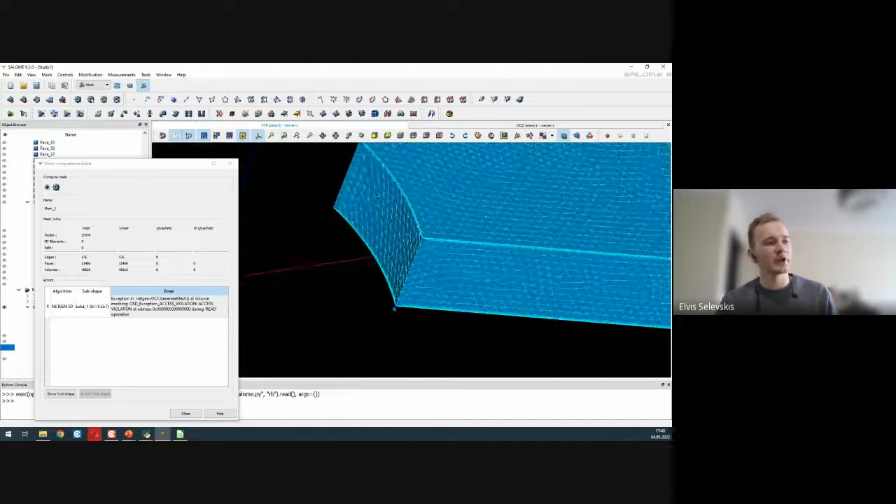So there's like some faces have it, some faces don't, and in some places, like this one, it's actually okay. We can see the viscous layer, there's no kind of issues that go on further into the workpiece. But here at the other end, we can see that the viscous layers at this edge are sort of colliding and shifting together, and that's making this error most likely. We can also see some kind of a red line that has appeared here. Actually, in this case, we might have gotten away with it if we didn't take the face that's on the other end here.

But as I said, this is exactly what I wanted to tell you, that you have to be cautious with this approach.

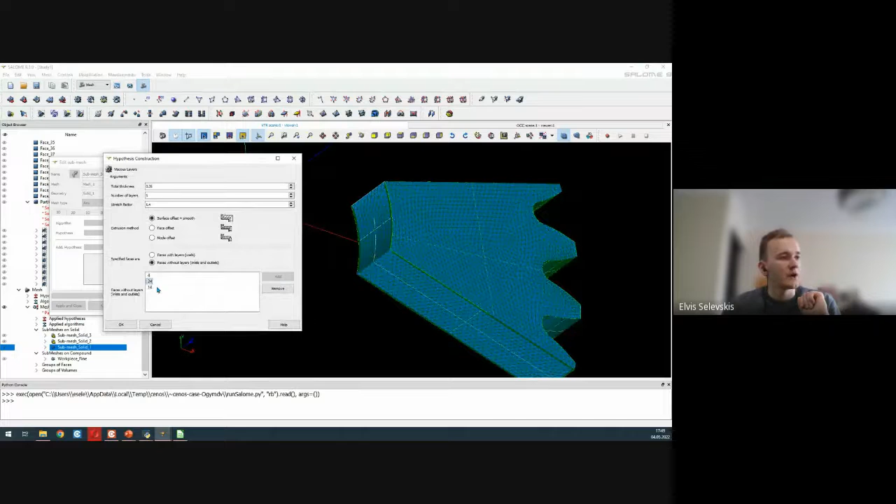So in this case, in order to get everything running again, I just go to Solid 1, Edit, and I can just remove these faces out and everything will work again. Another thing which we can try to do, we can try to get only this one face out, if we can find it. So this is actually 24. If we can see how it highlights, face number 4 is this one, face 24 is this one, and face 14 is this one.

So what we can try to do: click on face 24, the middle one, remove it out of this option, try to apply and close, clear the mesh data once again, and we can see if this time we will have an error or not.

Once again, this is more advanced, getting into some more advanced features which we can use. As I said, if it's not necessary, if you're not sure about this, I'm quite sure that your case will run okay, even if you have the viscous layers everywhere. So it's not something that's necessary to be done.

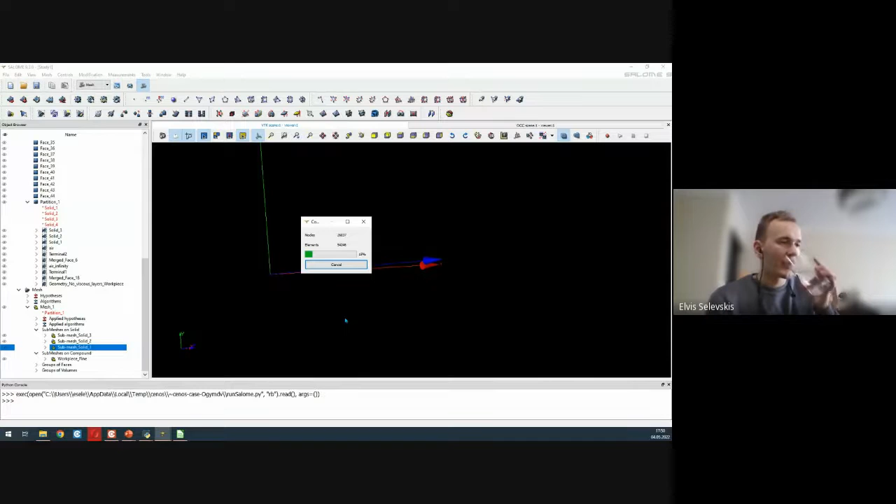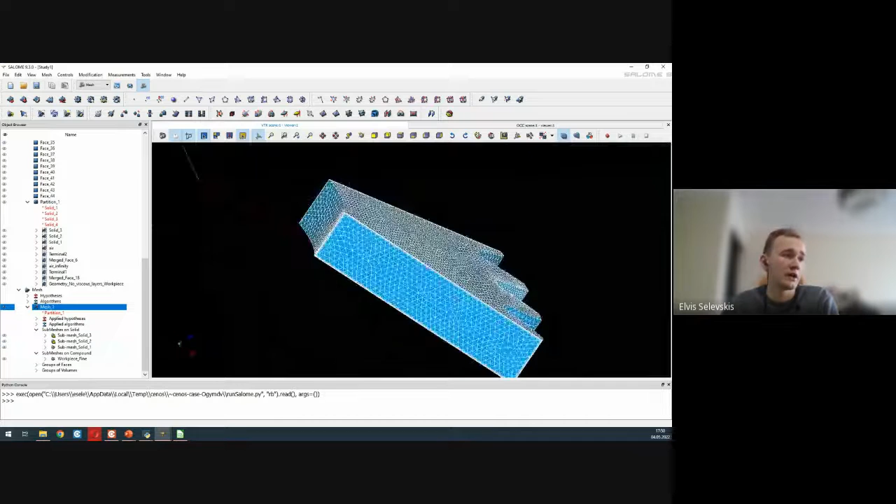Also, in the same way, this applies to the inductor. If you want some places on the inductor where you don't need the viscous layers, you can also do that. Actually, in this case, as I thought, the problematic face was this one on the very bottom. As we removed it from assigning there, we can see that there's no more errors. If we close it up, we can see that everything now works fluently. No more of these weird things here at the edges, and everything should be fine. And we have saved a bit of elements.

Yeah, what else I wanted to show you? Oh yeah, no worries. As I said, if possible, that's something to use if you feel comfortable with it. What I will do right now, I will click on mesh 1, recompute it. We will see how long this takes.

But another thing which I want you to understand is that this whole mesh, it's like a connected kind of thing. So everything inside of it, like inductor, workpiece, everything still is connected together by some kind of triangle. So if one of the elements is very fine, the triangles from that very fine element still have to develop and then go on to the other elements which are less fine. To better visualize this, I will try to compute the mesh and clip it open so you can perhaps better understand what I mean.

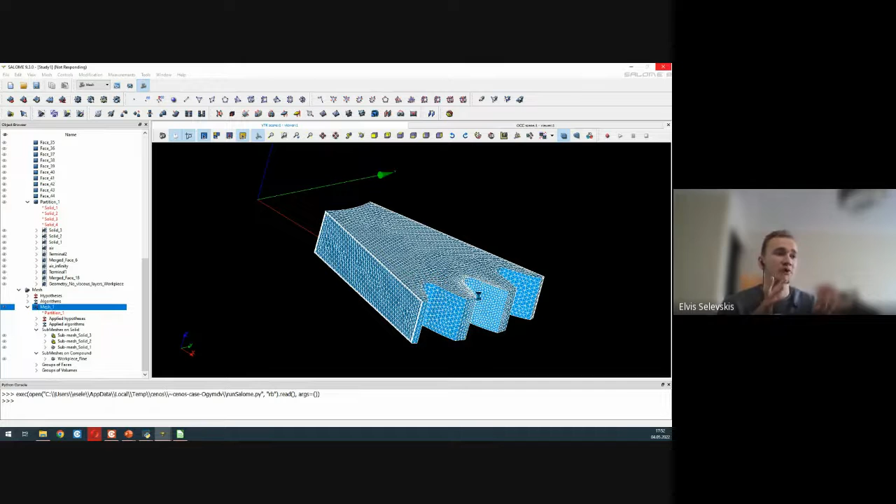Another thing which is sometimes very useful to do: here where we made that group for the geometry with no viscous layers, you can actually also make a group with some lines. And you can make a submesh for lines that would make places, let's say, as right here: this top line, this middle bit, and then the rest of it, that would make the mesh at those lines finer. That's also something to do, sometimes quite useful.

So here we can see our mesh computation has succeeded. We have a bit more volumes than we had at the beginning, but we have a lot finer mesh than we had in the beginning. So this is a lot better for the temperature distribution. Once again, to further decrease this value, we can make the rest of the workpiece submesh a bit rougher by adjusting the submesh solid 1 max size, increase it back to 2 as we had originally.

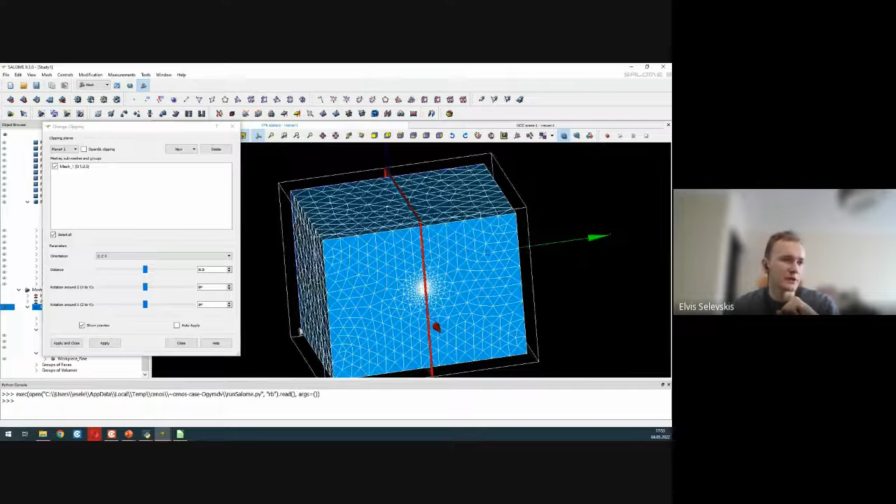Right now, to see inside of the mesh, I will clip it once again to give you an understanding of how everything is connected together. Something like this should work fine. Apply and Close.

From the side, we can see how the mesh is connected together. On the very outside we have very large mesh triangles, that's for mesh 1, where the airbox is - we don't really need very fine elements there. But as everything approaches the smaller elements, these triangles also start to get smaller. Similarly near the inductor, the air elements are also a lot smaller, so everything kind of has an impact on each other.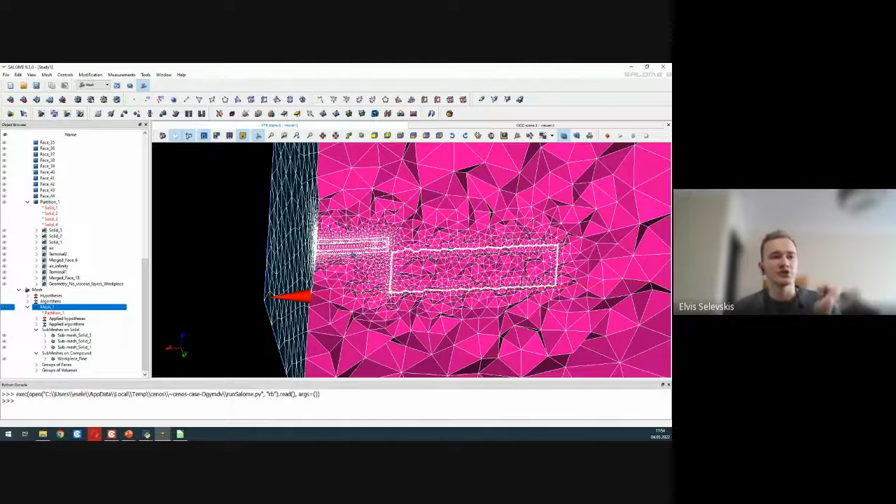That's something to keep in mind. If you have geometry imported here which is problematic with small details, you can imagine if the large airbox tries to gap into these smaller details, that causes problems. You can see it on our documentation page: if possible, either get rid of the small details if they're not critical to your design, or make these small details with a very fine mesh, similarly as we did here, and maybe the mesh will go through.

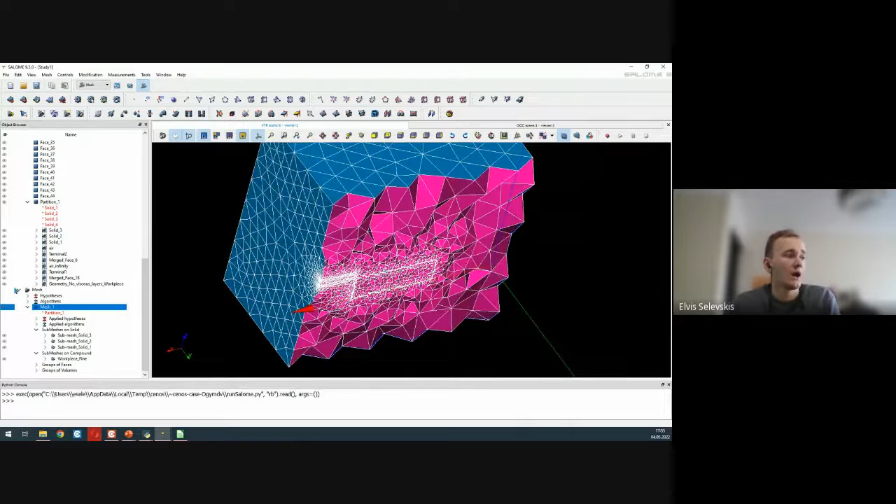For the last step I have intended, since we've taken quite a bit of time - the last thing you should know how to do after you compute everything is clear the mesh data and recompute the mesh. Once your mesh is perfectly okay, you click mesh 1, go to tools, plugins, and send the entire mesh back to CENOS.

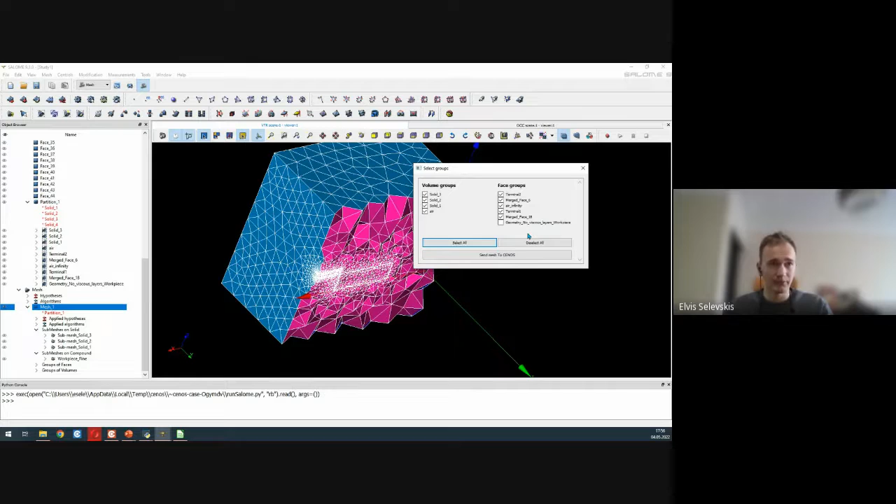Here you also have to select the groups that you want to send to CENOS - basically all the groups that you made in FreeCAD. The only change is that one group which I made in Salome: the geometry, no viscous layers workpiece group. That's a face group made in Salome which you do not need to send back to CENOS, because we only used it to play around with the mesh. Further, in the physics section we don't need that group. So we can just press send mesh to CENOS, and let's hope everything works - I don't expect any kind of problems.

Here we can see that the mesh is writing actually, so in this case we don't have any kind of issues.

A good point which Raymond has just written down in the chat is: can we check the mesh quality at this stage, as well as sometimes taper elements appear while exporting mesh to CENOS - but can we check it beforehand? That's a good question.

We can actually do that. Let me open our documentation page to explain, for those who don't know, the aspect ratio or taper. Taper applies mostly to 2D cases, where some elements sort of don't fit in the whole process. For taper, it's elements in triangles where the taper value is above 0.5. For the aspect ratio, this means some triangle elements have such a high aspect ratio from one side to the other that they're pretty much faces - they're so thin they're essentially faces, and that's not something we want to have.

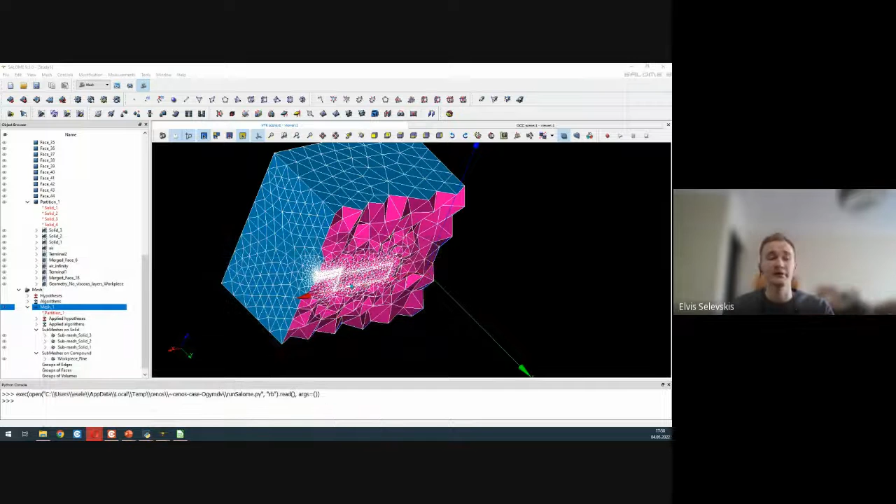To check if our aspect ratio is okay and we don't have very high aspect ratio elements beforehand, we click on mesh 1, go to controls, and we have face controls - here we have taper, which is exactly what Raymond was asking about. Or more likely for 3D cases, we have the volume controls, and here we can see aspect ratio 3D.

So let me enable it. We will see how nicely it visualizes. Okay, so yeah, it didn't visualize as colorfully as I imagined, but basically here on the bottom we can now see the maximum aspect ratio value.

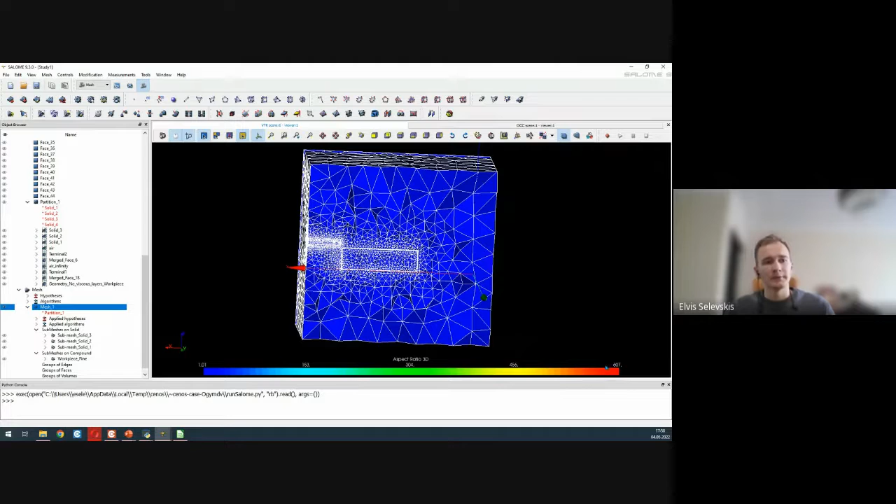That's like how thin the triangles are, and the minimum. The maximum one is at some kind of point inside of the mesh. We do not want this to exceed 10,000. I would personally recommend not having it more than 5,000 if possible, because if it's that high, that already implies there might be some kind of issue.

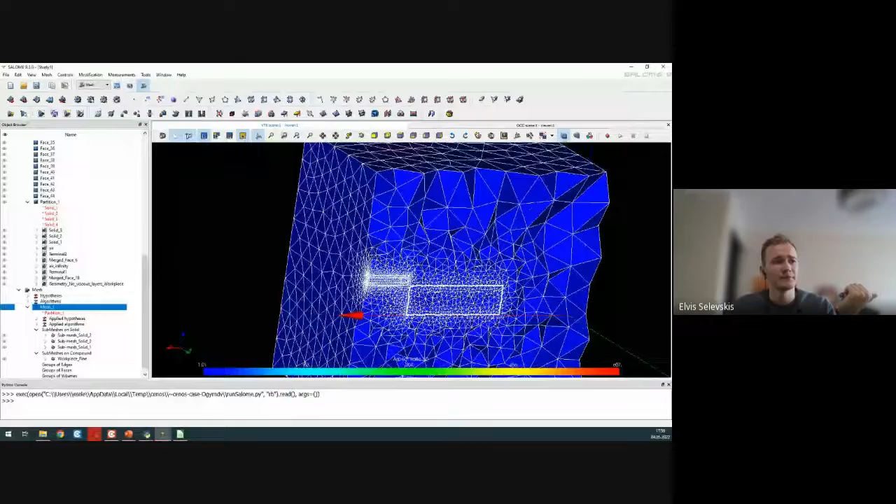If we zoom in, we might be able to find some of these elements, maybe in the viscous layers. Actually, it looks like we might not be able to find them, but generally in a standard case, if you zoom in to viscous layers, if your geometry is not bad or problematic, you should see these red lines, this redder part in the viscous layers or somewhere like that. If your geometry is problematic, you will see these in the places that are problematic.

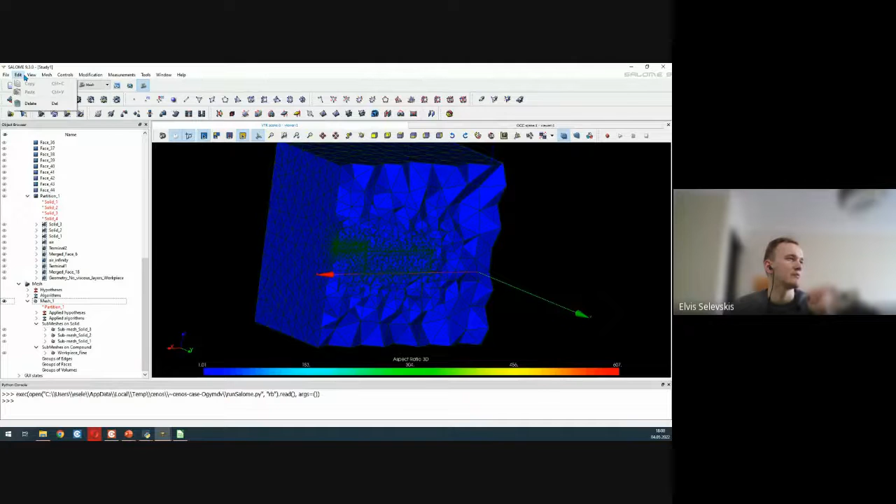But this is some kind of first test which we can do with the mesh to understand how large our aspect ratio is before we send it back to CENOS. There's actually another nice way to filter the aspect ratio elements - let's say all of the elements above an aspect ratio of 400. I've a bit forgotten exactly how that was done, but I believe that should be visible also in the documentation page.

Yeah, but actually at this point, since the mesh has been sent to CENOS, this is more or less it for what I wanted to explain. You can also ask any kind of questions which you might have gathered.

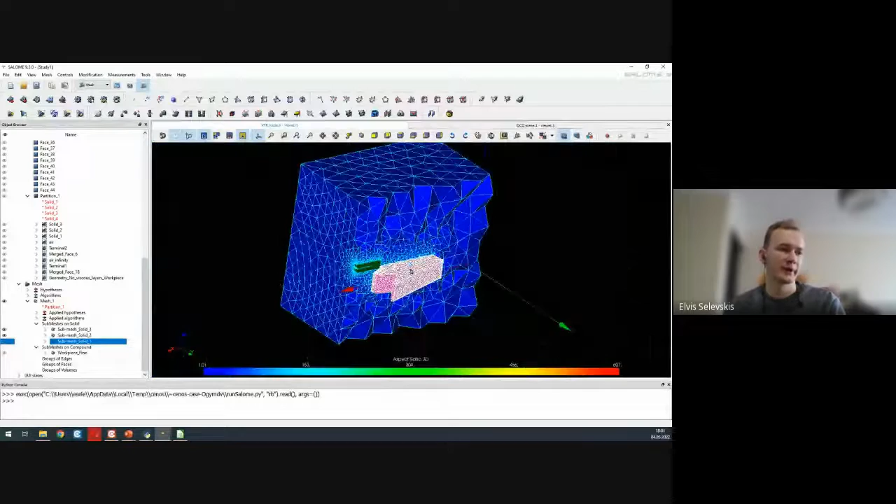Yep, no worries. I actually wanted to talk a bit more about some other things as well, but I hope I covered more or less the most common issues which we encounter. Well, some questions appear.

Once again, just to show you in our documentation page, all of the problems - most of the problems which you will encounter in meshing, especially the ones which are critical errors, those are directly connected to your CAD. If your CAD has some kind of issues, if your geometry is not as simplified as it could be, that's kind of what to look out for.

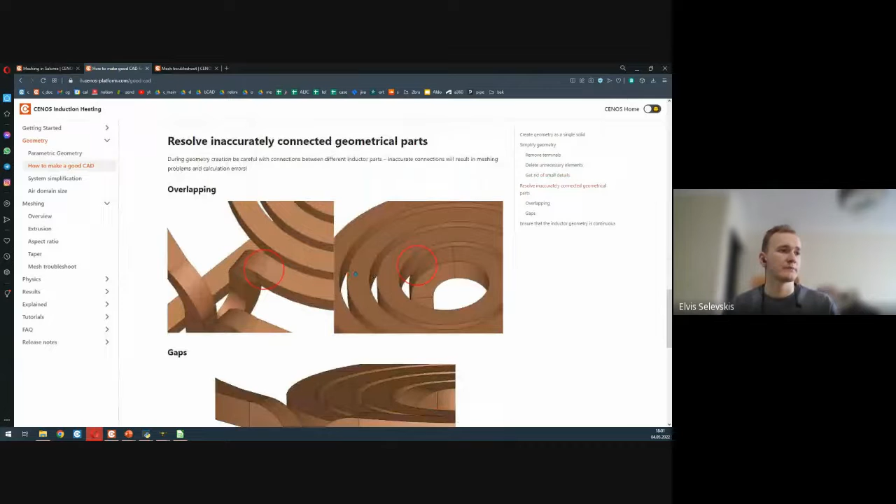That's also what we try to tell you, that these kind of issues will appear in the meshing. One quick tip which I can tell you: if you're experiencing these aspect ratio errors and you don't know exactly where your issues on the mesh could be, one thing to try, if you at least understand which solid the issues might be coming from, you can go in that solid submesh, right click, edit submesh.

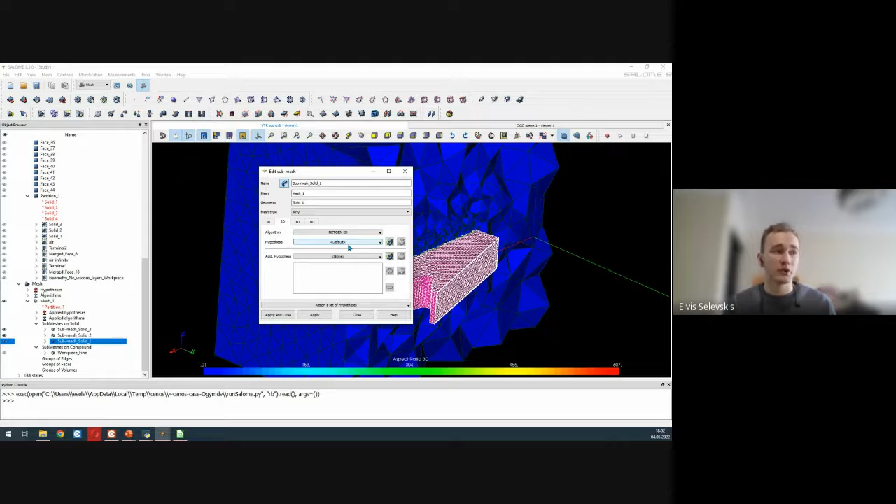Here in the 2D section, you can disable length from edges. What this allows actually is for more bad or complex CAD to be made in a more simplistic way that allows the meshing to go through. But if you disable it and also enable the triangle Mefisto as the algorithm, it will take a bit more time to compute.

But on the mesh afterwards, you might see a place where, let's say, the mesh is going as expected, so the triangles are the same, and then some point where you see a very, very small triangle. That's, at least from my personal experience, most likely where some kind of issue will be. That's some way to troubleshoot the geometry with the mesh, if you're not sure where the issue could be.

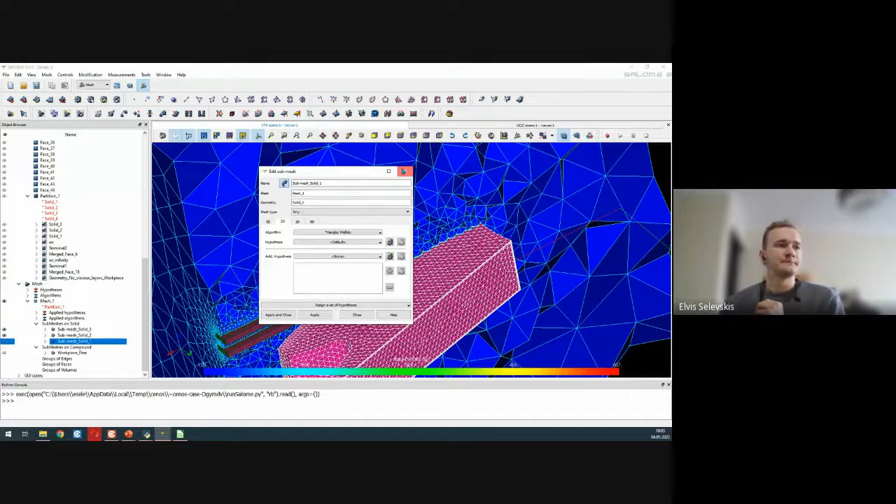Okay, I see no questions as of right now. So what else could I tell you? There's actually loads of things that I wanted to tell in this webinar, but I'm just trying to compress everything as quickly as possible. But yeah, I think I have covered most of it.